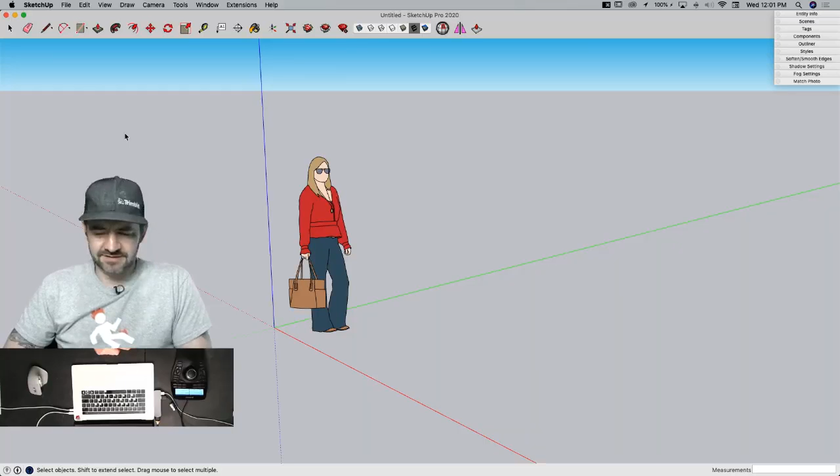And hopefully none of this craziness, bad stuff is getting to you. If so, if you feel like stuff's getting too crazy, just hop into SketchUp and model something, it's great therapy. No charge, oh wait, no additional charge, that's right, for the therapy part.

So we had a couple questions come through. Vlad asked on Facebook about the mouse on the left. This is a 3D mouse, it is made to move models in 3D space using this puck here in the middle. So as I move this around, we move in 3D space. Not a requirement for SketchUp, but a tool for showing 3D models, so it is a design tool too. It does help speed up the design process for me, kind of a nice option to have and a nice way to present 3D models to people. So that's why we use it at some point.

Oh look, it's already there. Jody has put up a link if you're interested in finding out more about it. I've heard that question a time or two before.

Mohammed on Facebook is asking if SketchUp is available for university students. It is, if you go to our website, I forget the name of the tab at the top, like SketchUp for Edu, I think, I got to go catch up. Jody can share a link on that too. But yes, we do have discounted versions of SketchUp available for higher education students. Yes, he's asking for university students.

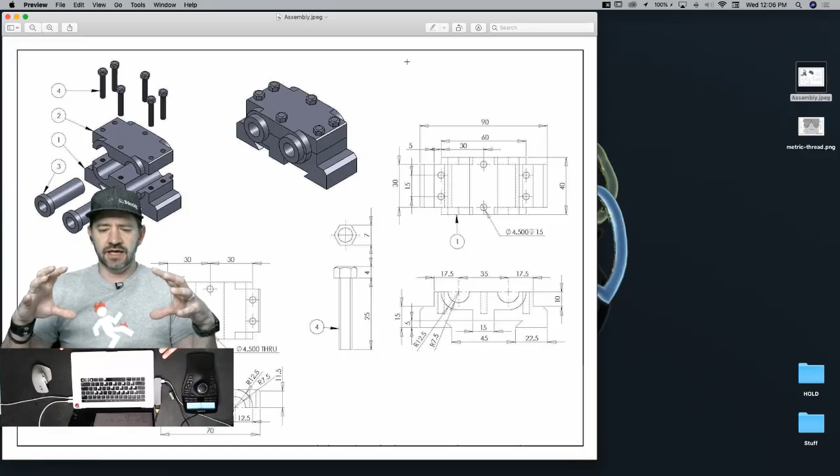With that, the first thing I'm going to do is come out here to my desktop and look at this image. This is a big image, so to pull this up and use it to model, once I shrink it down to fit so it's not covering my screen, it's going to be about that big. You can kind of see numbers, but it's not super clear, so I want to break this into smaller pieces.

There's a couple ways I could do this, but I really want to show you guys the simplest solution I've ever come up with: just do a screen capture. Is it Command Print Screen on Windows, I think? Or Control Print Screen—there's no Command key on Windows. It's Command Shift 4 that lets you grab a section like this. I'm going to show you both ways to do this, real quick, for these 2 parts.

What that does is give me just an image right here like this, so you don't need a photo editor or anything like that. Just make it big, take a screenshot, and then I could import that. If I want to do it 100% exclusively in SketchUp, we could do that too—let me show you how I would do that.

It's going to be a little bit different that way, but it is possible. So what I could do, if I wanted to do this in SketchUp, I would say File, Import, go grab my big image, which is my Assembly.jpeg, and import it. I'll just pull it in.

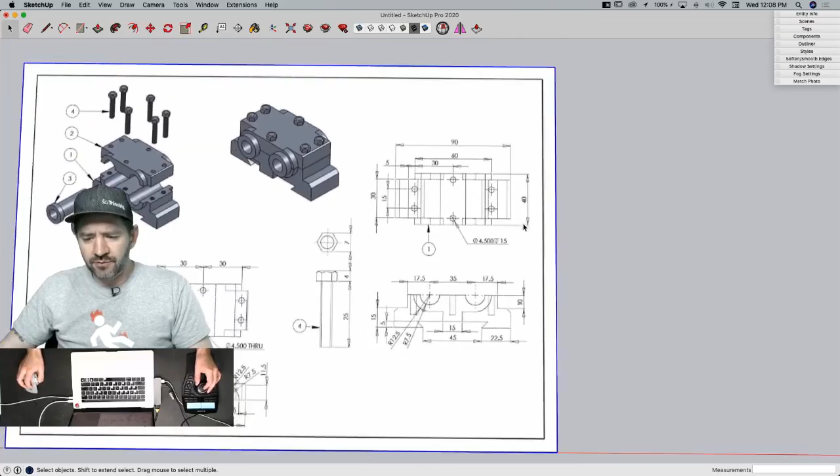All right, so that'll bring it up like this. An image is a weird thing. It's a special kind of container that contains a file. The way SketchUp does this is it actually creates a surface, the exact aspect ratio of the image being imported. It applies the image to that surface and then wraps the whole thing in a special group.

So to get in here, if I wanted to go in and actually cut this up, I could right click on it and explode it. As soon as I explode it, it's just a surface and it has material here. Actually, I'm going to back up one step. This is back into a group, and I want to just show you this.

When I bring this up and look at what's in this model right now as far as materials, it's just the stuff on Laura. Actually I have some extra things because on Monday we played with creating templates, and I created a new template, and I'm using it right now, and it has some extra stuff in here. I bet I have some extra components in here too. Yep, there's some extra components. Oh, I got a mess here. New template. Terrible. Yeah, we better do that.

No, well, let me finish this, and then we'll make a new from template. All right, so when I right click and say explode, it's going to take it out of the group and make it just a surface, but watch my colors over there too, because as soon as I do that, a new material shows up, and that is this piece right here. Once this is in here, I can do things like come in and trace this with a rectangle, and now this is its own piece.

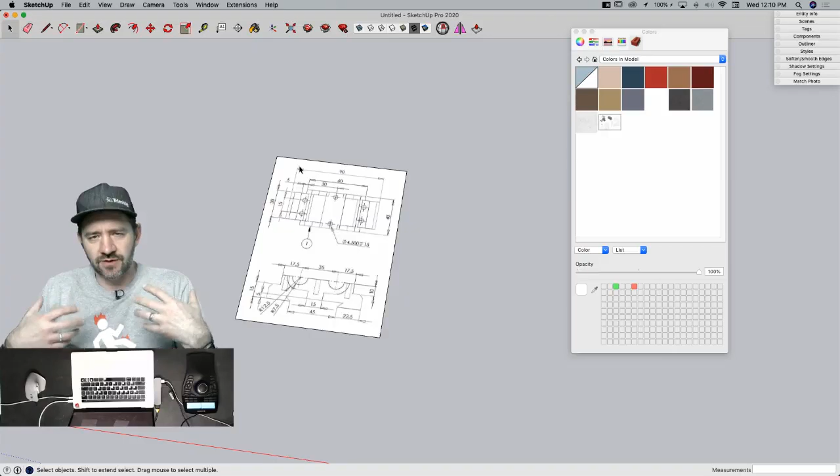What I want to do, because the way I do it is I always put watermarks in the upper left corner so you can see it, I'm actually going to work with my screenshotted images that I created before. I'm going to get out of this crazy template I'm in. I'm not going to save this. I'm going to do File, New From Template.

And I'm actually going to grab... So whenever I was doing this, I ended up using a template that had decimal and metric, and I just did 2 or 3 decimal places, just to make it easier to type all the stuff in. Yes, that is a good way to do it.

Let's go ahead and I'll use my architectural in meters. I'll just go ahead and open that one up. Why is it the architectural ones don't get that pretty green ground or the bright blue sky? They get kind of this gray ground with a gray backdrop.

Architects don't like exciting colors. The gray on gray is more designy, like you're just a pretentious designer at that point. Maybe the idea there is it doesn't take away from the design. The gray is the background, it's there, and then your design's like, wow, nice, right in your face. Yeah, something like that. Pretty sure that's it. That sounds right. I buy that.

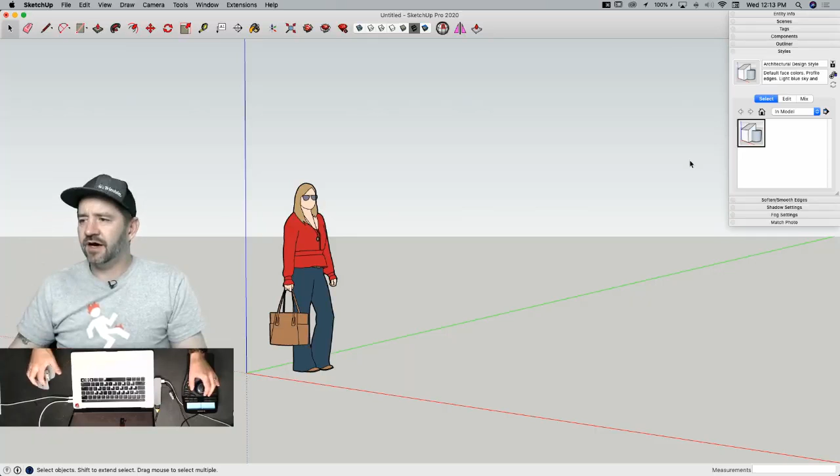I'm going to load one of those images that I cut out. Dave Richards said he modeled his in meters too, which is what we're doing. He also took his and stood it up in the background as an image. That works too - for my part, I like to go to Edit and click on Watermark, and load in one of those two pieces. Can we get that? There you go.

That's the small piece, here's the big piece. I'll go ahead and open that up and put it in the background. I'm going to leave it fully visible and put it in the upper left corner, and then shrink it down just a touch.

I went a completely different direction because I've got two monitors here - I just stuck the full-size image on my second screen, it's not even in my SketchUp model. That's actually how I would do this if I had the ability. I generally do most of my SketchUp work with two monitors, one for reference and controlling the music, and the other where the SketchUpping gets done. But in this case, if I put it on my second monitor, you guys wouldn't be able to see it, and I wouldn't be able to refer to anything. I wasn't meaning to correct you so much as Ian also confirmed he just had his stood up in the background, so I wanted to be clear. There are options, we got options.

Alright, so it looks like the base of this thing is 30 by 90. So I'm going to start with a rectangle that is 90, 30. Boom, alright. And we know we're modeling this big, so let me get Laura out of here before she complains about that.

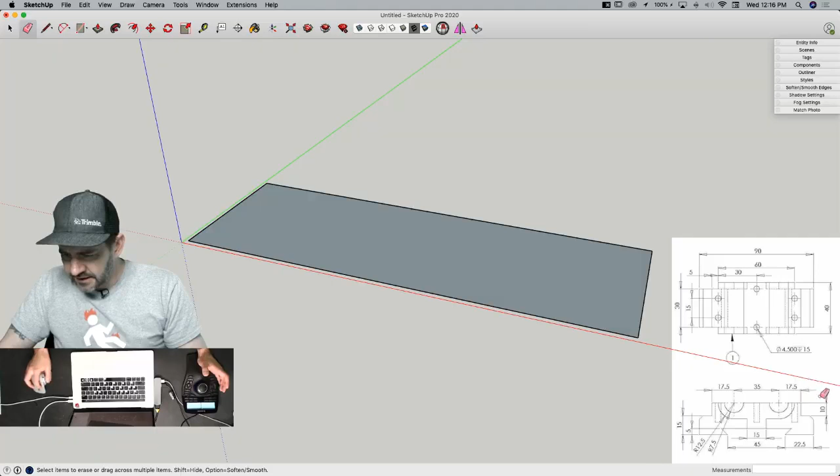This part, the base, is simple enough because from right here it comes up 15, then it cuts in here and here, and then goes up another 30. So I think what we can do to start is take this, pull it up 15, and then figure out what this length is right here. It also doesn't seem to have an angle for that little dovetail on the bottom.

I'm okay making that up - winged it, yeah, that's proper. 17 and a half and 17 and a half is what? 35, right, 35. So this is 35 and 35, which I know to be 70 - not because I did math, because I memorized that at some point.

That's right, you did it on the Gazinta chart. So half of 70 - if I take 70 off of 90, that's 20, so that means this line is over 10 on both sides. I can do this a couple different ways: grab this line, use Move, option 10, or come in here with a line, come this way, 10, Enter, and draw that line straight up. Either way works, either way just gets that face broken - that's the important part, a broken face.

So Manos was typing 10, he typed it a couple times, and I'm all of a sudden having this image of - you ever watch a game show and you're shouting along, no, it's too high.

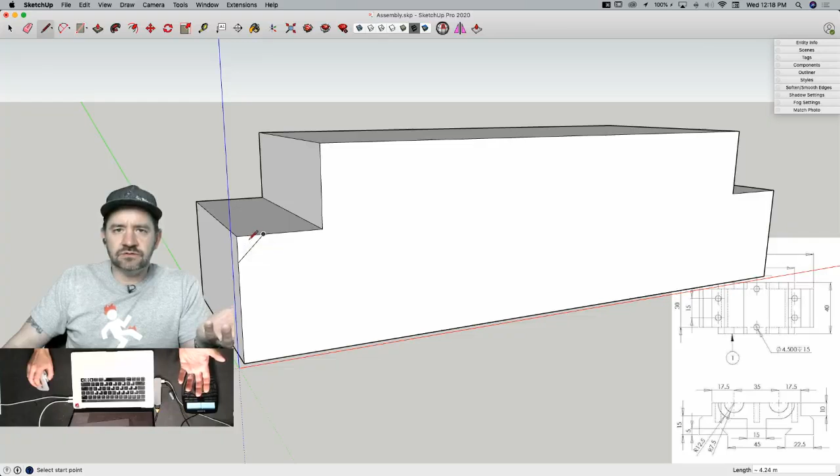This is something else to point out. I don't generally use or keep endpoints visible. In styles, you do have the option under edges to turn on endpoints, which will give you these little dots at corners. Sometimes, depending on what software you're coming from, if you're used to seeing those endpoints, that can be helpful. When I first started using SketchUp, I did keep my endpoints turned on, because when I would do something like this, to do that again, if I came over here and said go this way 3, I needed to make sure that I knew there was an endpoint right there, and that's what it'll do for you.

At this point, I've done this enough times that when I draw my line here at 3, I know it's there, I trust that it's there, and I don't really worry about it too much. But if, as you're learning, you're getting up to speed, endpoints isn't necessarily a bad thing to turn on, and it's not like it shouldn't be on. It's just extra stuff on the screen to get in the way of what I'm doing.

I'm not colorblind, but I would wonder if, because I know green and red are both the bad colors for most colorblind folk, I wonder if that would help a colorblind individual be able to do this a little more smoothly, because sometimes that round dot isn't red. That's also true, or green. My dots here change color depending on what I hover over. So yeah, endpoints might be helpful in that case.

All right, before I grab that and pull this through to knock off the corner, I'm going to select the surface. I'm going to turn on rotate, and I'm going to hover over the midpoint right here. I'm going to hold the modifier key, option or control, and then just rotate that around 90 degrees. By rotating it around 90 degrees, I just took that same geometry and slapped it right here.

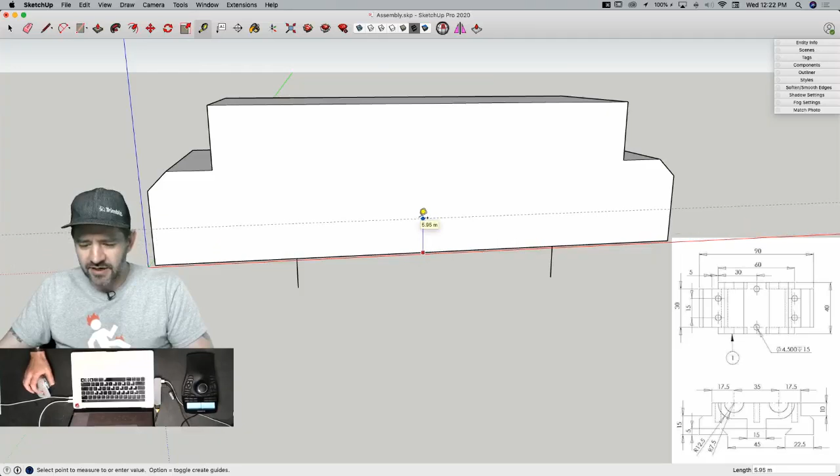All right, so now we know that this is going to go up 5. We're going to have a flat line across here at 5. So I'm going to use a guide - I hardly ever use guides, so I'm going to do it this time. I'm going to grab this line right here, click on it, drag it up, 5, enter, and now I have a guideline right there.

Now, Andrew suggested, since this appears to be symmetrical, why not just do half at a time? I could. It's actually not a time saver in this particular case, because as I go into draw it, I'm going to have to draw 1, 2, 3 lines to draw half of it to get a surface that I could flip over.

My inclination would be to get my angled line, flip that over, and then just connect it with the top. So it's possible. I guess I do this real quick analysis in my brain saying, is that symmetric geometry worth modeling only half of? Even this whole thing, I could chop it in half and model half of it, but the geometry that's copied is so simple, I don't know that's going to save me a whole lot of time to do that.

Yeah, that's your call. If it was a lot more complicated geometry, I would probably break the whole thing in half and model half of it. But in this case, it's simple enough that I don't know how much time is actually saved.

All right, I'm going to go to Protractor. I'm going to come down here, grab this line right here, and rotate that 45 degrees. That's the only reference I need, because I can draw this line up here from the corner to the point it meets right there. Then I can grab that line, do my rotate thing again - find the midpoint, rotate it with the modifier key, 90 degrees.

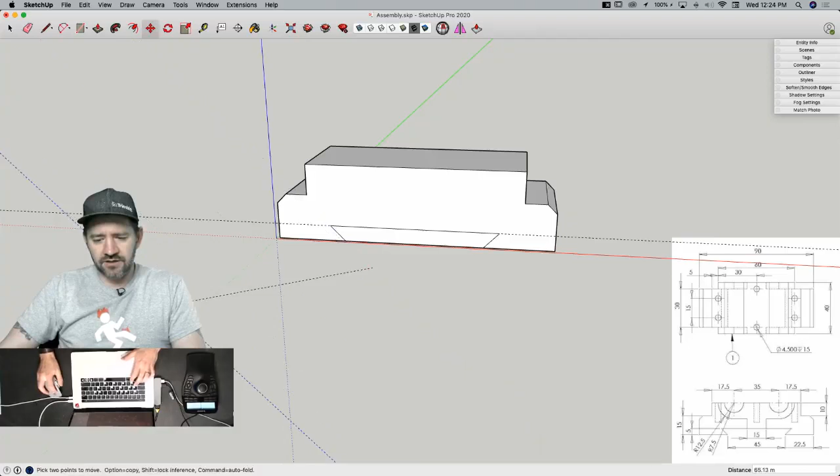At that point, I can get rid of these little lines I put as placeholders, and I could also get rid of those guides. Somebody asked how do you get rid of guides - they're just geometry, there's actually nothing special. The nice thing is they're lines that don't break other lines when they touch, but as far as how you work with them, they really just work like edges do. So if I want to move one, I just pick on it and move, rotate, whatever - nothing special to them.

There's also a command up here where I can go - I should remember where it is now. Tools? Is it tools or view? Edit. I don't have any, so it's probably grayed out. Where's delete guides? View - it's right there, it's highlighted, the 8th item down under edit. Oh, delete guides, I was on it - that's why I was looking past the one that was actually on for something else.

Delete guides will take all of the guides that are not hidden at the time. Or somebody pointed out you can hide them if you want to use them later - that works too. All right, I'm going to take that, push that through the back side, and we have our base geometry for this chunk done.

I do have - so this piece right here, this kind of looks like the front of a Jeep, Jody. A little round, and hey, then, yeah. Or a robot, cartoon skull or something. E.T.? Yeah, yeah, these are all good kinds of answers.

So Ian said having a mapped shortcut to deleting guides is really useful. That's a pretty good idea - I suppose if you use guides, getting rid of them is something you want to do on a regular basis.

Well, he also did say above he was a sucker for guides, so hey, he's the guide master. He's a guide guy, he should write a guide. Ooh, then you could call it the guide from the guide guy. Yes.

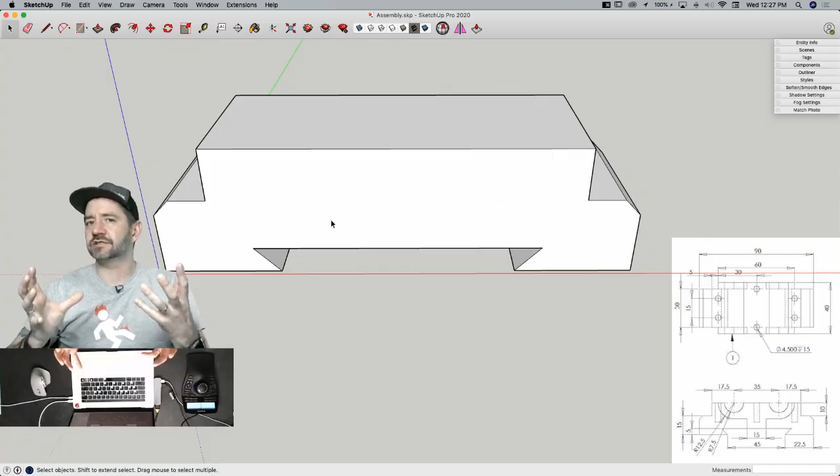With this, that means I'll have 12 there. So if I come back to draw an arc later, like half an arc, I know I'd use half of that 48 if I want to match the geometry. So what I'm going to do is continue on with this guide thing.

I'm going to grab my tape measure and pull a line this way, what was it, 17.5 according to my drawing, to the center of that circle. And I'll pull one off of here too. 17.5. So these are the centers of my two circles.

So now I'm going to go to circle and set my sides. It's popping up down there as 24, I'm going to type 48. And then I'm going to go right here, and make sure I pull my circle along the red axes.

That's going to make sure that I align my axes the same way. So anytime I draw a circle, if I pull along the red, they'll be lined up correctly. And the radius is 7.5.

And now I could draw that again, or I could grab these two halves and just copy that to right there. Either way works, whatever you feel best with.

All right. You do you. That's right, you do. Just do your thing. You be happy. Be good.

All right, so I have another circle, same spot, coming off the same spot. That's 12.5. And I guess I could have waited and copied all of that at once. That would have made a lot of sense.

But yeah, sometimes you just get excited. Your enthusiasm is appreciated, it shows. That is a thing I do. I try to put positive spins on it too.

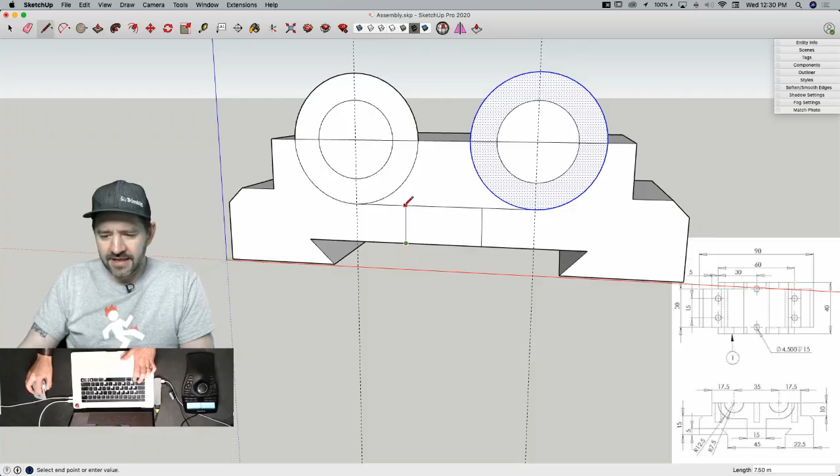Hold on, I could come here. Wait, you don't have that many fingers. This would be kind of my default, is to click here, come this way 7.5, and then go to that point. 7.5, drop that down, come this way the full 15 meters, and then take that one straight up. That would be my default way of doing this, but I want to show you guys some different options.

We're on this guide kick, apparently. So what I'm going to do is just draw a line right here in the middle for right now, and say, put a guide here, 7.5, here, 7.5. And that gets me that same reference geometry.

Another option. All right, I got one other way that I could think of doing this. This one's a little obscure, a little weird, I admit. I could come down here, anywhere on this bottom edge, click, and draw a line that is 15 long.

So now I have a line. This line is separate from the geometry here and here, even though it's in line. I'm going to turn my endpoints on so you can see this easier.

I can see that break right there, this line, and now I could grab that line while it's highlighted, go to the midpoint, drag it over until I find the midpoint of this other piece. And then from there, I could just draw my lines up. So we got options, we got different ways to do it. That last one's kind of weird, but I did no math. That's the only one I used without any math.

Okay, alright, fine. So a self-issued challenge there, and that would be my solution. I wouldn't recommend it either. Personally, I'd say the guides treated me pretty well right there, so I'd probably stick with that method because that worked out pretty well.

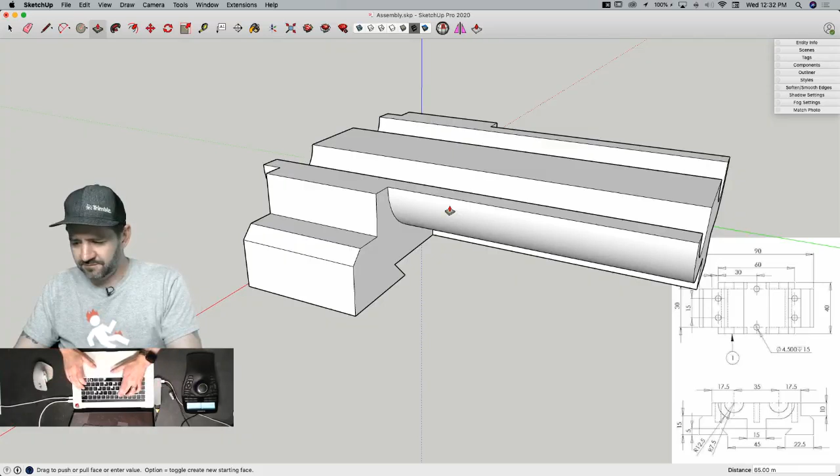Alright, now just come in here, push pull this through, push pull this through. Looks good. Pull this one out 5. Pull this one out 5... whoop, or 65. Try that again.

If you mistype something, SketchUp, as long as you don't go to another command, you can always retype the dimension. So even now, I haven't done anything else, so I can come in here and type 12, I could type 3, it's going to move as many times as I type something, as long as I don't go to another command. Once I go to another command, now I'm in select, and I can't just type things anymore. I can type them, they just won't do anything.

Alright, that looks like our first piece, sans screw holes, because we haven't made the screws yet. So that looks pretty good.

I'm going to grab all of that and I'm going to make it a component. I'm going to call this the bottom piece. Or you could call it the Jeep, or the frog, or the Jeep frog skull. Yeah, yeah, yeah, that it is. Okay cool, so that one's done, that looks good. That's easy.

I got nothing more positive things to say because that pretty much covers it.

I'm going to go back into my styles and go to my watermark and swap it out for a new one. I'm just going to delete that one and add a new watermark. I'm going to grab the other - excuse me, hopefully this is not something you have to worry about, this is just what I have to do because I'm working off my one screen. But if you're ever in a situation where you have one screen, this maybe is one of the pieces of knowledge you take away with you today, is how to use a watermark for reference imagery.

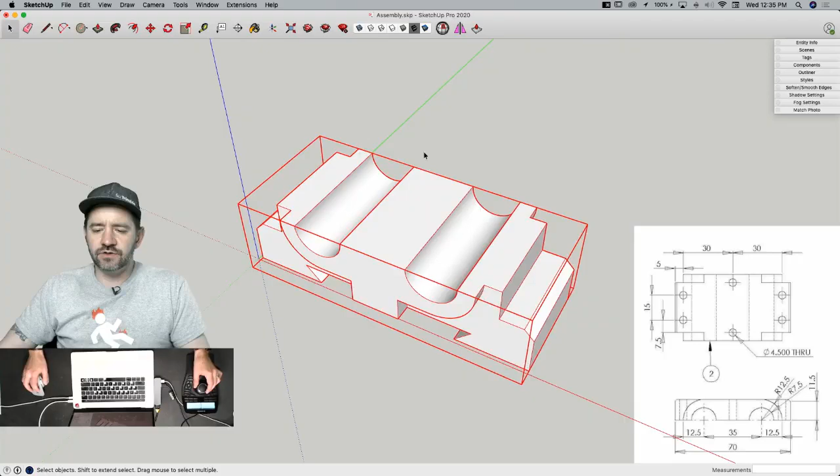I'm going to right click and lock it. By locking it, I just told it that I'm not going to accidentally come in and select it or move it or anything like that. It's going to stay right where it is, but I can come in and work on top of it.

So the base here, this should be 60 by 30 - no, 70 by 30, 5 plus 30 plus 30 plus 5. And that's that rectangle right there, that's this inner rectangle - or outer, I'm sorry, outer rectangle. That has a height of, oh come on, it has a height of 11.5 to the bottom of the corner.

We talked about this. Yeah, seriously.

What I know is that this geometry repeats up here, and this outer circle is 12.5. So the overall height here is actually 12.5 with a 1 meter 45 cut off the edges. You can intuit from the math that the chamfer on this piece is only 0.5, possibly, because it looks like it's only 0.5 up there. Is that correct? This is 1, because 11.5 to 12.5, so that's a 1 meter. But no, I think they're different. Maybe it's a 1. I'd have to look at the model again because this one looked a lot bigger.

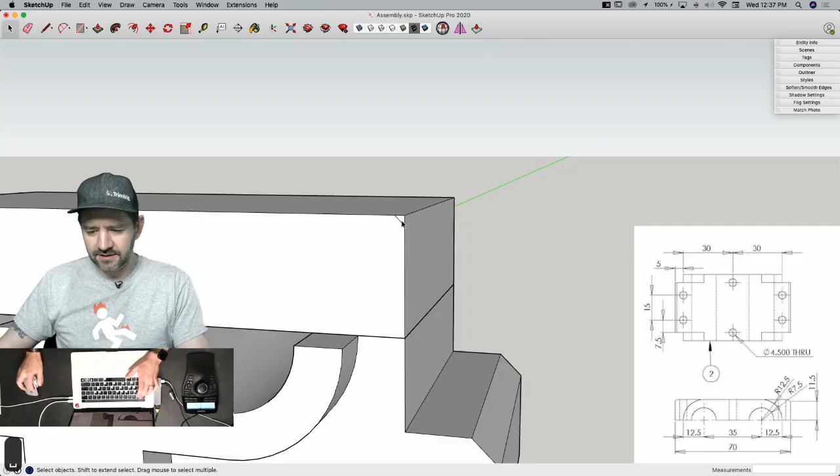All right, so I'll do 1. I'm gonna come here, drop down 1, which should be 11.5 from the bottom. I'm gonna go 1 this way, and then do the same thing I did before - I'll grab that little shape right there. Actually this gets a little trickier because I can't rotate from the center of this point. If I rotate from the center of this point, guess what's gonna happen - that's going to show up on the outside edge. Why? Because I just shortened this length by 1 meter by putting that on there. What I can do though is use the center of this one below and swing it around like that, because this line is still the full length. I say that like a person who's maybe done that incorrectly before.

Adam Seb1 on YouTube wants to know why you're doing meters and not millimeters. I can answer that - SketchUp at its heart is an architectural modeling tool, that's what it was made for. So it's not created to generate sub-millimeter geometry. One of the things we're going to be doing is creating screws with threads on them, and that's going to be fairly small geometry if we modeled in real size. So we're going to model in - was this 100 to 1? Is it meters to millimeters? 100? Is that 1,000? Bigger, 1,000, right? Cent is 100. Mil is 1,000. What's a decimeter, is that a decameter? Decimeter. So we're going to model everything using the same units - we'll model it all in meters, and then scale it down by 0.001 when we're done to have everything be the accurate, perfect size.

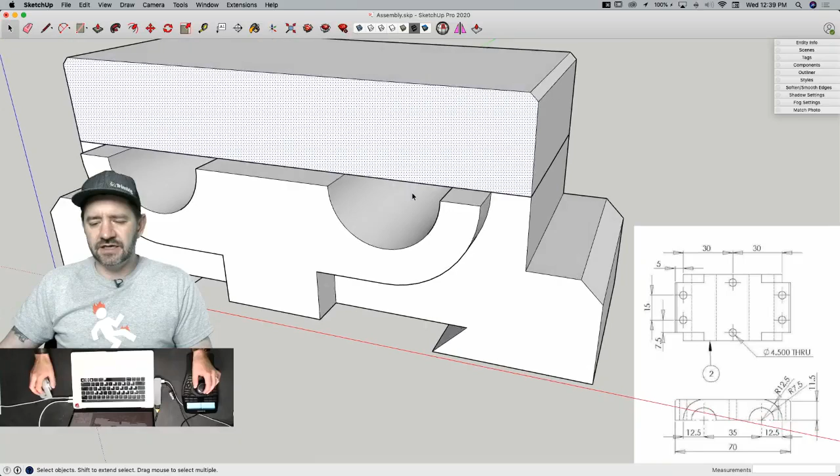All right, this looks awesome. So one of the things, if I do say so myself, that we could do is I could hop in here, grab this face, copy it, come back out of context, paste it, flip it over, and put it on here to speed up my input. But the fact of the matter is this is two curves that I'm just going to copy over, so I'm not that worried about it - it's pretty simple geometry. If this were a lot more cut up with curves, or came up and curved down like that, I might be more tempted to grab this. But right now I can actually come in here and, no, I can't do that.

I'll just do the same thing I did before, where I'll grab my guide - I'm learning all about my guides. 12.5, whoops, 12.5. What did I do? 17.5, I'm sorry. It's 12.5 from this line right here. I can take this one in. 17.5. You think you're just trying to be too efficient, getting ahead of yourself.

I'm getting something. All right, and then I'm gonna grab my circle, which is still at 48 sides. I'm gonna click here again, drag across the red axis, and at this point I can actually snap - I can say come this way, and that snaps at 7.5. I'll do my second one right here to 12.5. So, like I said, I could go copy geometry out and bring it in later, but I don't know that it's that big of a time saver. I like time savers as much as the next guy, but sometimes processes you think will save time aren't as much help as they could be. Copying stuff in particular is a double-edged sword - sometimes you grab a bunch of geometry and it has to be so heavily modified after copying that it would have been quicker to recreate it in the first place.

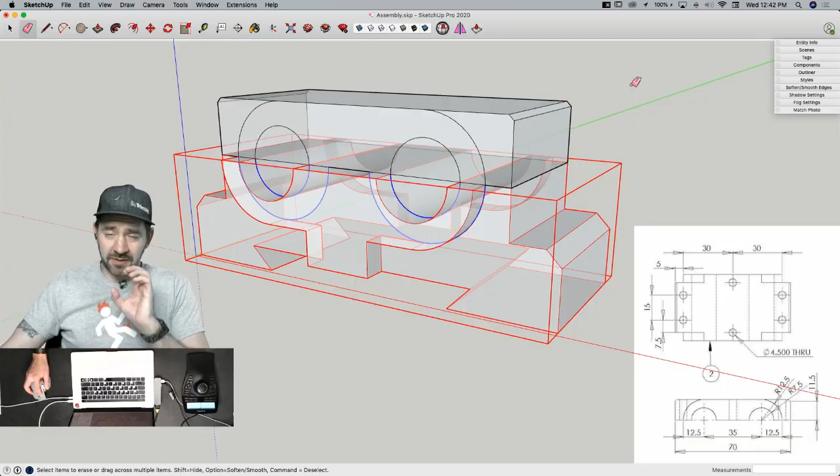So there's a couple things I could do. The easiest one, though, and I'm going to leave on X-ray, is to just swipe my eraser across here, because the only thing that'll get erased are the pieces that I just modeled. Remember, my bottom piece is locked. So even though I drug the eraser across there, it's not going to go away. Just those pieces below are.

All right, last piece. Same thing I did before. I don't need to work in X-ray. I can go, let's rotate, middle point here, drag it across green axis.

I've gotten people calling me out on how I say the word axes. Axis. So there's two different words there. I know, axis, so you can say axes, each one. Axes? Plural, singular and plural. Axes. That's not right. All right, I'm going to just double click. There's something about Axe body spray in there too, but I don't know it. Yeah, that's same spelling though.

All right, so there we go. Yeah, we have our second piece. I'm going to triple click and make that into a component. And I'm going to call this my top piece. Boom. Bottom piece, top piece.

If you didn't need to connect the two together, then you'd be done. That's true. But I do. Alas, I do. So I'm going to lock that piece too. I could be tagging these two as I go through. I could actually tag these each with different levels or with different pieces, but Command S. It's such a simple model. I don't know that I'm going to even turn anything off right now. So this is easy enough.

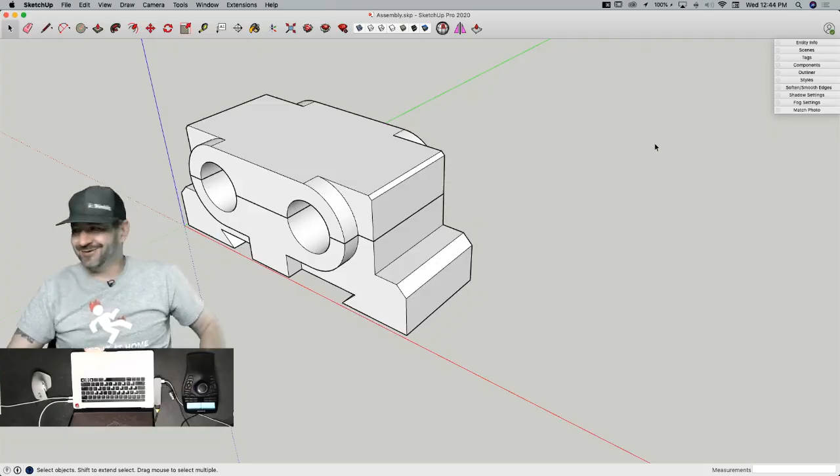All right, good stuff, we're there. We're back at it. Okay, let's see, what is next here? We have these sleeves that go into the hole. If I come pull up my main drawing, you might call those again bushings. Bushings, I like that term.

These are pretty darn simple. There we go, I'm going to just do the same thing. I'm going to take a picture of this right here, and then I'll import that to model from. I thought they'd be simple enough, there's like 4 dimensions, but let's be honest, I don't need that as a reference image.

I just forgot how to remove a watermark while I was in the process of removing a watermark. So I'm just going to be fair about where I am. I said on Monday, right? You know, it's unprecedented, crazy times. Just do what you got to do to get through it. That means I'm going to pull in reference images even though I don't need them.

Okay, that's the thing we're building. Let's talk a little bit about components and axes. That's what we're going to do now.

All right, so I'm going to draw this totally separate. I could draw this in place over here, but I'm going to draw it totally separate over here, and we're going to go place it into the main model. I'm going to start with a circle. I'm going to draw it on the ground, and I'm going to pull out along the red axis, same as I did with my vertical circle. I'm going to pull the axis.

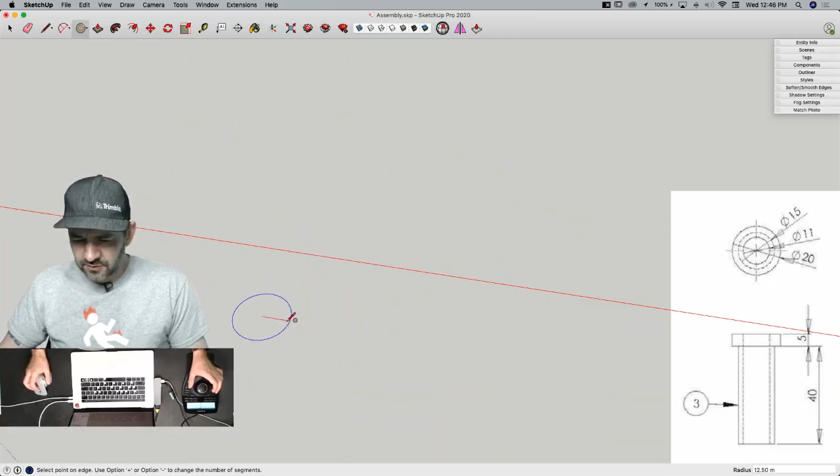All right, so I'm going to pull this out. I'm going to actually create my 3 circles right here. I'm going to pull out the first one to 11. I'm going to hover over the middle, pull out along the red axis to 15, and then one more time from the middle to 20. I feel like now every time I say axis, I'm being a smartass.

You know, I tend to think you're just being a smartass anyway. Yeah, so, we all got our thing.

All right, so I'm going to take this one in the middle, delete it. I'm going to start by pulling this up 5, and then pull this up 5 also, and then pull it up another 40.

All right, I'm going to draw that actually a little bit different now that I thought about it too. You know, sometimes the second time you draw something it's easier than the first time. I'm going to draw my first one with a radius of half of 11, which is 5.5. My next one, I'm going to pull out to 10, again on the red axis.

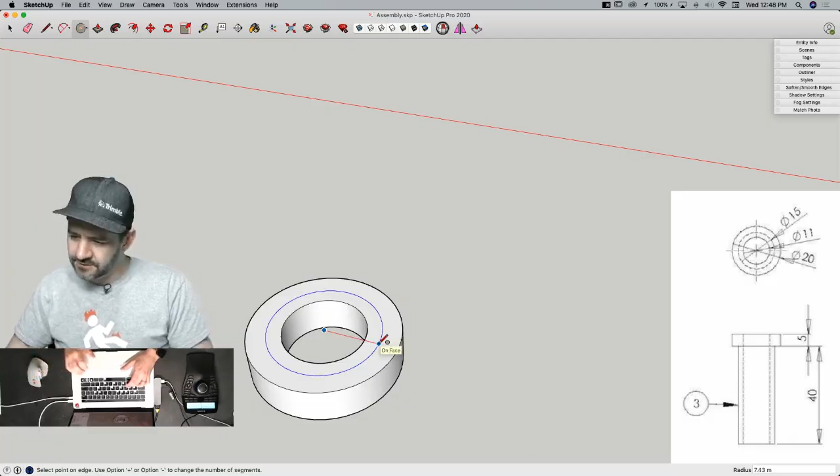All right, now I have another circle I can come over here and draw. I'm going to hover over the edge, go to the center, and pull that out to half of 15, which is 7.5. Then I can pull that up the other 40. All right, we've created a bushing.

That's it, that looks more appropriate, you didn't argue with that. I was right? I remembered the term you used.

That's right, bat 1,000. All right, so I'm going to take this and make it a component. I'll go ahead and call it my bushing.

Now let's talk about our component axes. Yeah? Yes, yes, it says it right there even, your cursor is literally pointing at the word axes. No, that says axes, like I have 5 axes that I cut wood with. Oh, that's a good point, stupid English language. I only use 2 axes to cut wood. Well, I use one, I have one for each hand, okay? So you have 5 hands? I was waiting for that.

All right, so now I'm going to talk about making those component axes, placing those component axes. So when I grab this as a component and pull it into my model, it's going to get placed based on how I set this up. Right now, if I did nothing and just created it, it'll always take your geometry as if it were inside a container, take the lower left corner and make that your origin. That's how it always starts out. What I want to do is put it somewhere in the middle so it's real easy for me to place it into the model.

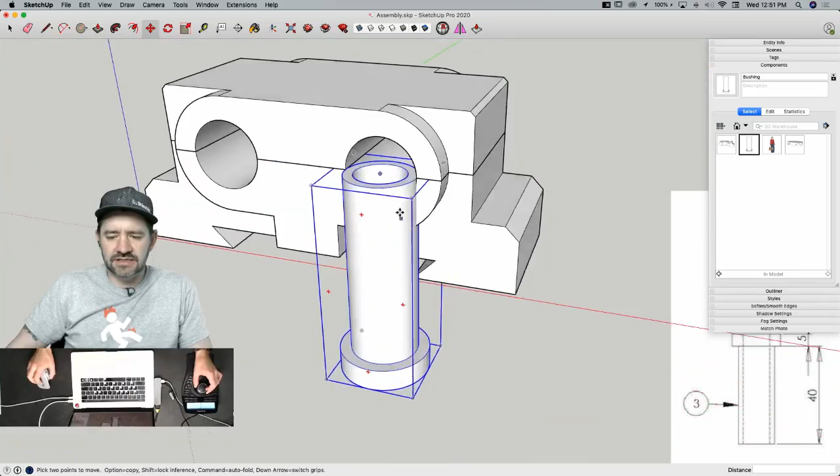To replace an axis into a component, all you have to do is double click to enter the component and grab the axes tool. Now that I'm in here, let's look at rotating it. Instead of having this portion be up, I want the top of the tube to be vertical. So I'm going to click right here, and it says pick direction for red axis.

The red axis is correct, it should come this way. Green axis, oh dang, will be vertical. So if I drag up on the blue axis and click, now I have my green going this way. If I click outside to exit, it's going to prompt me that I just changed the axes of this model, asking if I want to do that. Yes, I do. Now when I bring this in, look, I'm grabbing it by the same point, but pulling it in from the opposite side, in the correct direction. So now I could come over here, hover, find that middle point, and drop it right there.

Nice, same thing here. So both YouTube and Dave Richards have offered to muddy the waters. YouTube says he calls it a hatchet, not an axe. And Dave said you could use origin. So now I got to replace my hatchets for my bushing? That's exactly right. Oh no, the cutting thing. Gotcha.

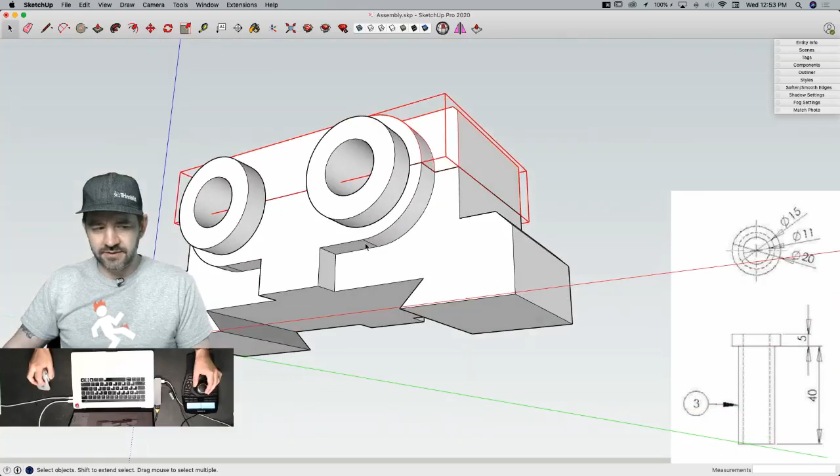First thing, just looking at this, a couple things I want to mention. One is this line right here, it's also on the bottom. These two lines, I don't have to keep those here. I'm going to actually grab both of these and unlock them. I'm not exploding them, I'm keeping them as components, just unlocking them so I can modify them. If I double click, I can come in here with my Alt or Control key and just smooth those surfaces. I like the look of that better.

Same thing on the bottom here. I could come in here, Alt, erase, or I could triple click, then go to Soften and Smooth and say Soften Coplanar, and that'll get rid of it too. I only tend to use Soften and Smooth if I have more than a handful of lines I want to soften. I like the precision of being able to go in and choose which lines I want, or if I'm in a situation where I have a hard line that will otherwise be softened by the engine and I want to keep it, then I'll manually soften those lines. But that looks pretty good, that turned out perfect, exactly what we were looking for.

All right, hey Tom, welcome. You may have been here for a while. I haven't looked up for a while. Well, he's in there dropping terms like X, Y, Z for defining your axes. Who's Zed? Apparently he has something to do with axes. Was he a programmer on SketchUp at some point? Maybe he's the lead singer of Molly Hatchet.

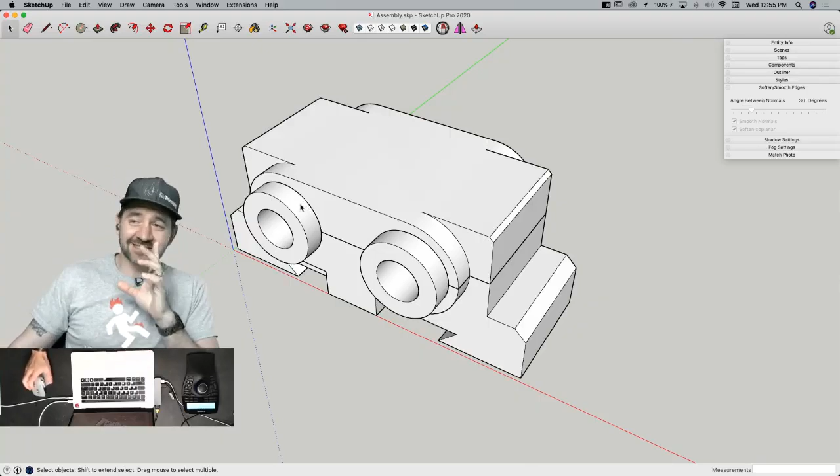All right, so let's talk about screws. I did a couple videos a while back. Was that maybe a year or two ago? Zed from Molly Hatchet, yeah, that sounds right. Yeah, that's good, oh I believe it.

Yeah, a couple years ago I did a video. It was right when SketchUp for Web came out, on modeling a spiral and then turning it into kind of an arbitrary screw pattern. It was not a precision model, just kind of how do I make this screw pattern using only native tools. It really consisted of creating a spiral, then two spirals overlapping on a cylinder, and then shrinking one of them to pull the edges in. It worked pretty well, the geometry still works, and it will give you a screw looking pattern.

What we want to create here, though, is an accurate screw, something that is a real screw with proper pitch, that kind of thing. So let's take a look at how we'd go about that. I think I posted this too, I have a picture that explains how pitch works.

So we do have the M word here - we have some math going on. We have the pitch, which is the distance from either the valley or the peak of the screw, and then the angles between the two.

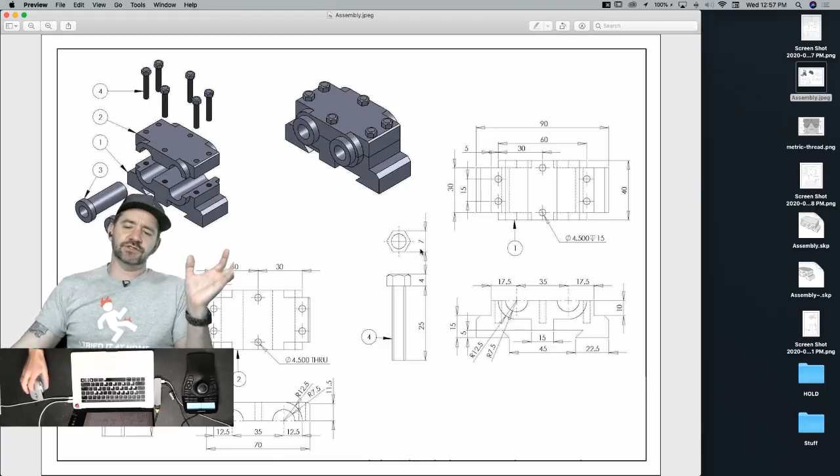So that's not awesome. As much as I like doing these machine drawings because we get to be pretty accurate with them, unless that's this 4.5 outer diameter for this circle - that could be what that is. Is that this width right here?

But I was looking up... not that one. And you saw some clouds? No, I only see ceiling. Oh, if I look at...

This website, torre.us, actually has, based on materials and screw sizes, how big some of this stuff is. So Dave's saying it's a 4mm screw - it's an M4, where the pitch is 0.7. So that's really the thing I was looking for, was finding that number.

So our nominal, okay, so it's 4. So let's do this. I'm going to have a circle that is 4, and I'm going to have a pitch that is 0.7, and we'll model from that.

So now when I come in here to draw my screw, I'm going to go grab my circle. Right now my circle is - you're right, I keep saying screw, this is actually a bolt. Cowboy pointed that out - we are actually creating a bolt and not a screw. Nice try, though. People kept asking for screws, so I'm actually not providing what anybody asked for.

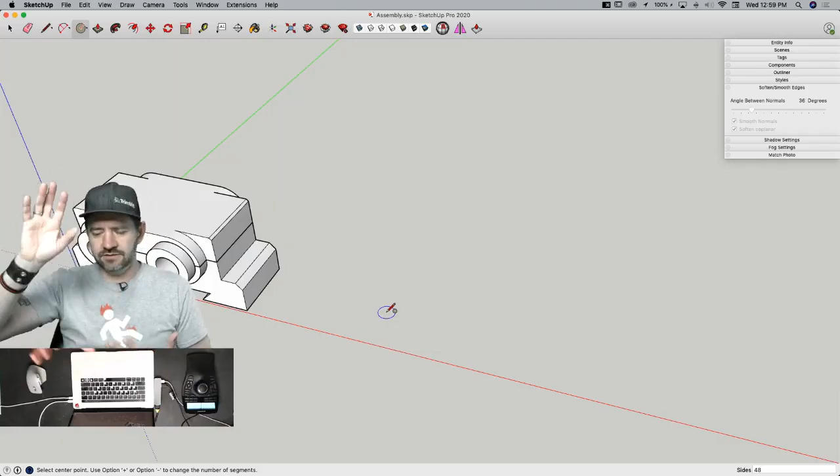Okay, Dave Richards pointed out that machine screws are not tapered, so we're creating a machine screw. All right, I'm going to use the Tom term and call this a thingamajig. I don't know what else to do.

Okay, well, YouTube's asking if you could imperialize it for him. Well, it never hurts to ask, because I can't physically interact with you in any way, much less hurt you, so ask away. The worst you can do is ignore him or say no - I don't know which is worse.

So yeah, we're doing a metric screw because our whole model has been metric thus far. One of the nice things about metric is it's very easy to scale up and scale down - you don't have to worry about all kinds of weird fractions and stuff. I'm a big fan of base 10 mathematics.

Okay, you can do that. That sounded really fancy and smart. It did - it's smart enough to make me not want to reply. You just shut me down, Jody. Okay.

So here's the thing - right now my circle is 48 sides. That's going to create a very, very dense screw geometry, with a lot of pieces that are very small. I don't need to do that. I don't have to have this be super highly detailed.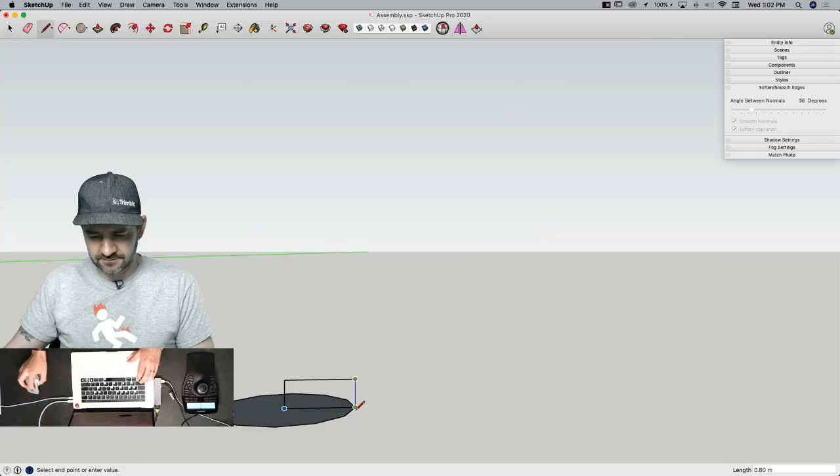A double hexagon. Oh, that sounds about right. I'm pretty sure that was a total lie. I looked it up, I didn't know before I asked. Is that a dodecahexagon? Dodexagon? It's just a dodecagon. That makes sense. Or maybe it's pronounced dodecagon. I don't know, could be. I would take any of them. Thanks, all right, all right.

So I'm going to actually import this because I do want to reference this. So I just drew this - this is just a rectangle. Oop, hold up, back up. Just wait, what the heck do you think you're doing? I'm going to take this. So I drew this out onto the x-axis just like I normally would. But I'm going to change it right now.

Actually, let's do this. Let's grab all of this stuff, scoot it over, and work on the axis. A lot of times when I'm working on round things, I like to work off of the axes or the origin of the model, because this gives me a reference line all the way up the thing I work on. I don't have to worry about maintaining the center - I can just work off of that. So what I'm going to do is, because I'm going to be doing a follow me, I want this to be a little bit different. So I'm going to rotate this.

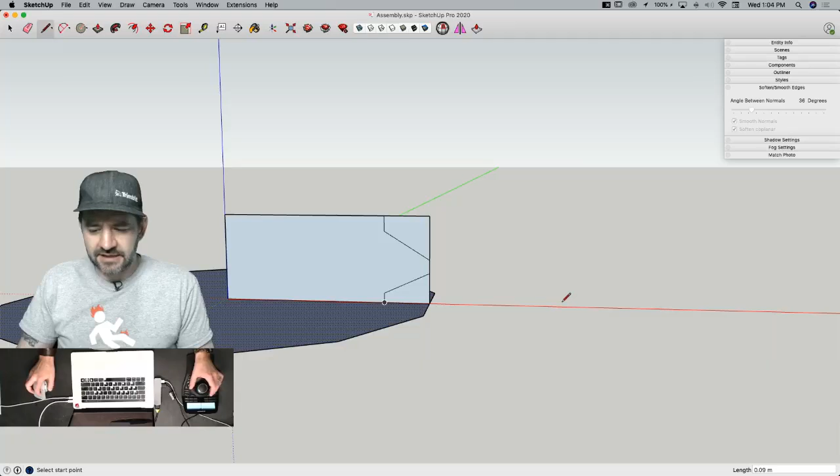I'm going to grab the center point of one edge and rotate that to the axis. And now I'm going to draw a line that goes up our pitch, which was 0.8, over to here, straight down, and back. And now what we'll do is we're going to come in here and create our pitch, something like that. That's not the right numbers - I was just kind of illustrating what the heck I'm trying to do here.

What I got to do is get that profile, figure out what that is. And that's where I'm going to come over here and go to Styles, import again an image. Put it down here. Make sure there's enough room to get everything on the screen at once. All right, there we go.

All right, so what I want to do is get this measurement right here - this P is this dimension right here. This point right here is this spot right in the middle. All right, so I only want to create half of it.

And I start... John pointed out that an M4 pitch is 0.7, not 0.8. Oh, dang it, all right. Well that just made my math not... Who pointed that out? John? Okay, you're responsible for doing the math coming up. I'm going to bring it down 0.1. I got all excited because this math was going to be easy, and now it's not.

So I'm going to draw a line right down the middle, because I only want to create from here to here. So now the first thing to do is figure out what is 0.7 divided by 8? And now we'll wait 45 seconds to get the feedback loop in there.

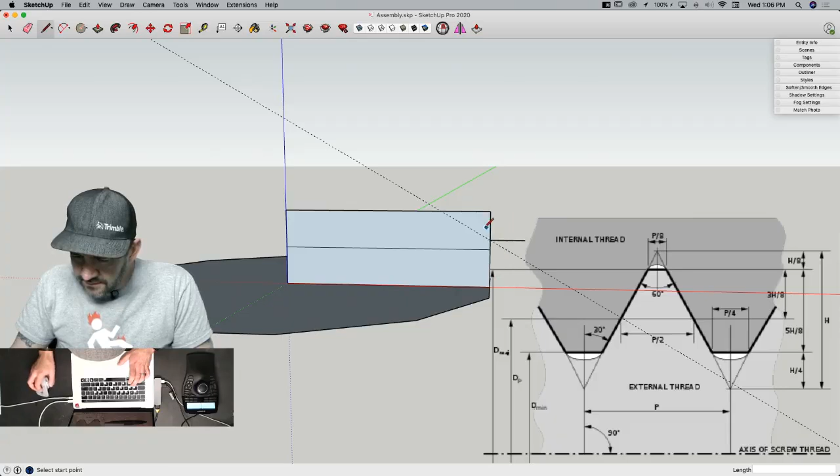I don't know where we figured that out from - oh, there we go. 5H, what the crap is H? Oh, this has to do with my thread. 0.7 divided by 4. Hold on, so many numbers. Because now I have my H, which is, I believe, related to... course, or no, that's the pitch. That's this. Oh, H is right here. Okay, never mind, I got it. So if I go... Yeah, that's the one thing that does not appear to be defined in your original picture. Right, so this is my H.

That number, 0.61 meters, is my H. So what I need now is, Dave said you need the minor diameter.

I wasn't ready for all these numbers, you guys. All right, somebody do this for me: 5 times 0.61 divided by 8.

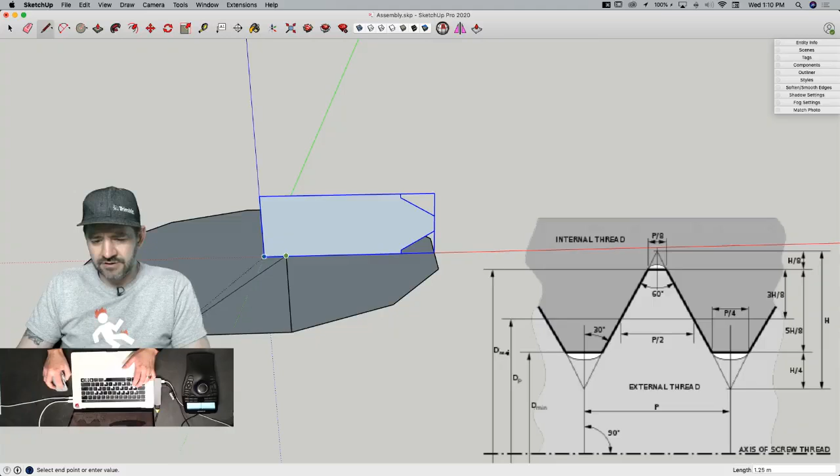Yes. And now I'm going to take that line and rotate it from here to here 11 times, the whole thing like that.

I'm going to grab all of this except for my profile. I don't want just my lines. I'm going to move them with a modifier, vertical, 11x.

No, this is wrong. Looks like I went really aggressive really quickly. Maybe you'll need to go up half that thread. Is it half or is it 1/11th? Because this will go all the way around one time, right?

Oh yeah, yeah. So what I need to do is take this vertical line and divide it into 12 pieces.

That's not much, let's see what happens. All right, so I'm going to grab that line. The process is the same regardless of how I do this.

And if I come here, click here, option here, 11x. Now if I look at it from the side, obviously it's easier to grab them if they're a steeper pitch, but it's still just a matter of selecting like that, turning that off, and then I can move it from any corner.

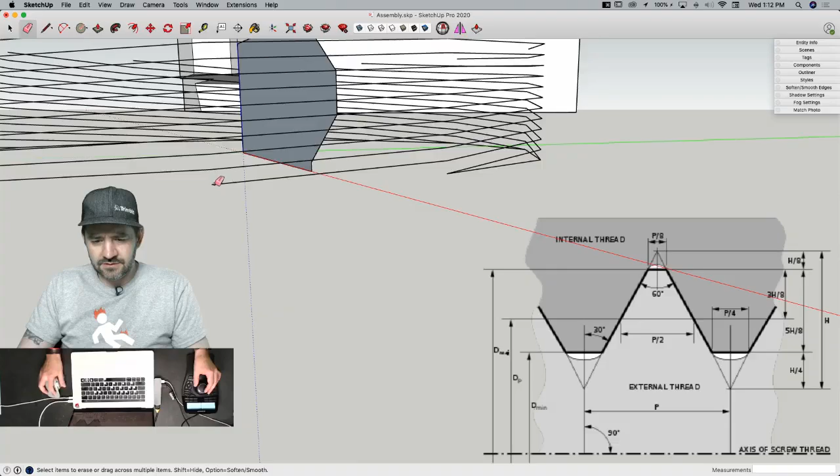All right, Dave Richards said he uses Curve Maker to create the helix. I'm going to grab just one of these pieces and say make group, and that way I can grab everything that is not this group and delete it.

All right, I'm going to grab this, put it up once, and say 9x, something like that. I'm not 100% sure it's going to happen right now. All right, I'm going to take all of this and weld it.

I'm going to explode that, grab that, follow me, edit group, and boom.

Yeah, that is not correct. Awesome. No, my geometry is not actually on the thing. So let me try... there we go.

So I think we're coming back to that wonky thing where it's got to be perpendicular to the right. Ah, that's it, yep, starting point. You're absolutely right. So it's on the line right now, but it is not perpendicular to the line.

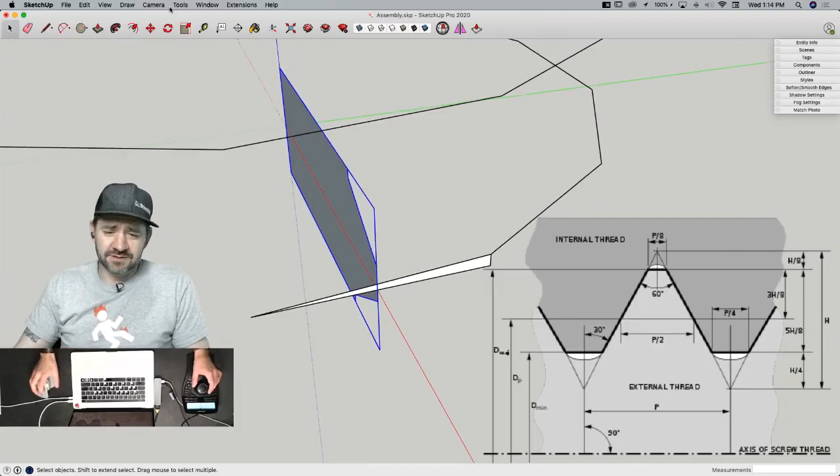All right, let's stick on the red axes. And then this is currently 3.2-ish.

Here's what I'm going to do. Yeah, it looks like upright extruder would definitely be the way to go. Yeah, probably so, eventually the way to go. I was hoping to do it without using extensions.

So let me just bear with me for one moment. I'm going to take this right here, take the flat. I mean, if you only made a quarter of this and then just rotate it, or an eighth of it, once you create the initial starting climb, then you can just use that one piece and wrap it, rather than do the full follow me the whole way.

Well, it shouldn't be a difference, right? I should be able to go... Well, it's just if you notice, it gets worse the higher you go. That it does. Why? I want it to not get worse.

Thought I was perpendicular. I thought I was good, but I wasn't. I wasn't good. Yeah, I thought I could make that work, guys, but I can't.

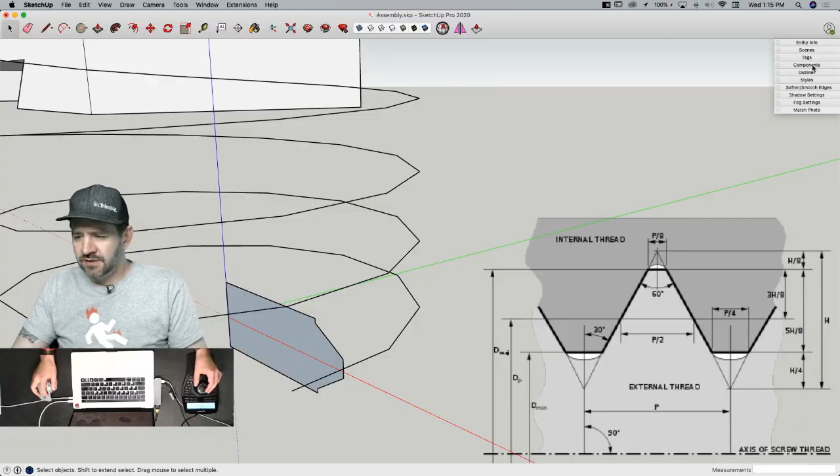So talk to me about the JHS Power Bar or whatever it's called. Is that just basically someone's compilation of other people's tools, or are they all tools created by that one person? Yes, they are a compilation. So I think Eneroth, thomthom, I think has some on there, Tig, trying to remember who else. But yeah, it's a really cool extension. It's good stuff.

All right, get rid of that. We'll go grab upright extrude. Actually, we'll just turn on - I happen to have JHS Power Bar right here. Boom, just right here. Someone else suggested Follow Me and Keep. Actually, that got mentioned a couple of times. I've never used that and don't have it, so I'm opposed to that idea.

Just because I know how this works. All right, so if I grab this right now and I can use upright extruder, I think this is going to work. Oh, I had to select the face. I think I have to explode it too. All right, so if I grab all of that, I should be able to just hit upright extruder. That didn't work either. Wow, batting a zero.

Connie said you already have upright extruder installed too. Oh, was that in there also? Although, I'll be honest, you guys, my extensions are a bit of a mess right now. So yeah, I don't know what I got going on.

All right, so I'm going to try something. I'm going to do this real quick, and if it works, I will undo and explain what I just did. All right, let's try upright extruder on that. No wait, that's not it. That's upright extruder.

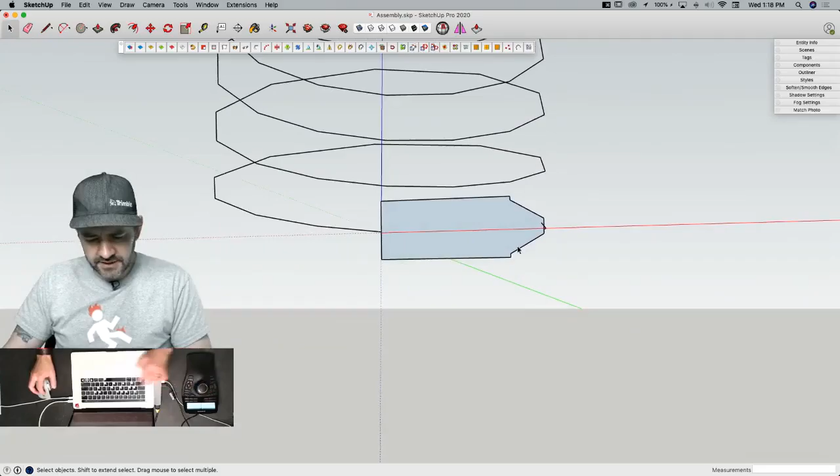All right, so what I did was I modified my spiral ever so slightly. Don't forget to save. I was trying. Oh, that's why it was weird, it didn't save. I saved, let me try this.

Let me grab Follow Me and Keep on my spiral. SketchUp tutorials says Follow Me and Keep will do it correctly. Well, I never have used that. Let me see what happens if I...

Rotate this. So this is right here. I'll grab this and extend this. Okay, I'm just curious, I'm messing stuff up. I'm making a huge mess here, but let's see what this does.

I wasn't planning on having to use this. I thought I was going to be able to make Follow Me work. I was not able to make Follow Me work. Well, that kind of created something similar. So that made no difference.

I mean, what I got is, so from here to here is 0.7. So I have a properly dimensioned... yeah, now we're just talking about different extensions that will do this, but yeah.

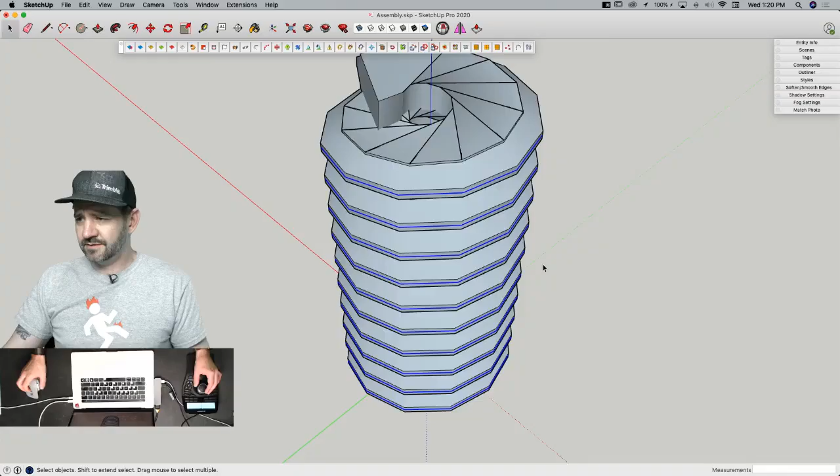Yeah, I did. Somebody's saying, so that my geometry does extend through to the center. This is the center of the spiral still. No matter what I've done, I've kept this as the middle of the spiral.

But what upright extruder does is it actually turns that geometry each time and flips it to 90 degrees to normal, and it's actually causing it to be longer the other way. So if I go back here, this is where I started out - actually I started out at this. So this is a totally upright profile, starting in the middle, so kind of horizontal.

Here, let's take this, explode it. So if I grab the path and the geometry and I hit upright extruder, see that only goes that far and then it breaks - it doesn't even make it around a single turn. What I have to do to make this work is I got to get this geometry pushed to 90 degrees to my path right here.

So Dave, you're saying you intentionally do this and then just fill the geometry afterwards? That could work - it doesn't matter since you're going to be deleting the stuff in the middle anyway later. Yeah, all right, so what if I did this? I'm gonna get silly.

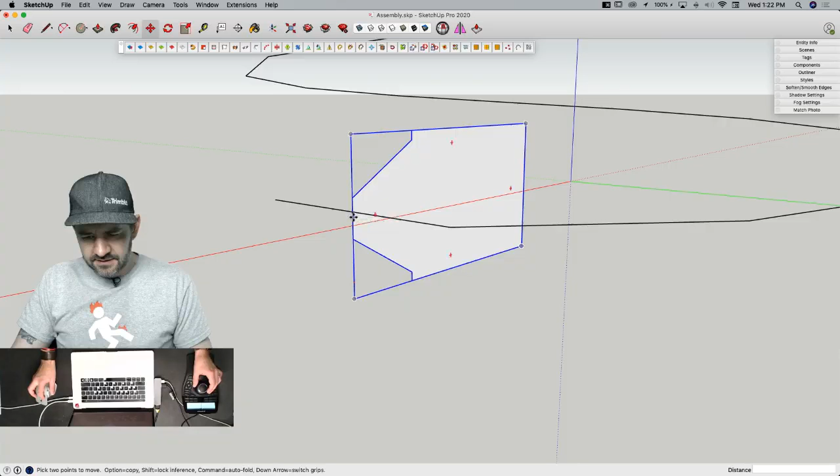I made my last piece of thread totally horizontal. This is on the green axis. My edge of my profile is on the red axis and it's vertical. So I'm gonna try this.

Let's try both. I'm going to start by grabbing all of this and say follow me with this shape. Still doesn't work, okay, so we've verified that's not an option. If I grab all of that and say upright extruder, what happens? It still only goes around there. I don't understand, that confuses me.

Because what should happen is if I just take this shape and say follow me, I start pulling it around here. You can see that the middle line is starting to slip as I get through here, and you can see how the back end is starting to tilt back. So that's the problem, is that it starts to spin around. I don't know why upright extruder is not okay with this.

I mean, I have a solution. I know that if I go in and tip everything the way I did, I can at least get it to kind of work.

You can also use this chance to try and learn how to use follow me and keep. Okay, I'll do it, because it sounds like you're making it up as you go anyway. Yeah, at this point we're off the track, so.

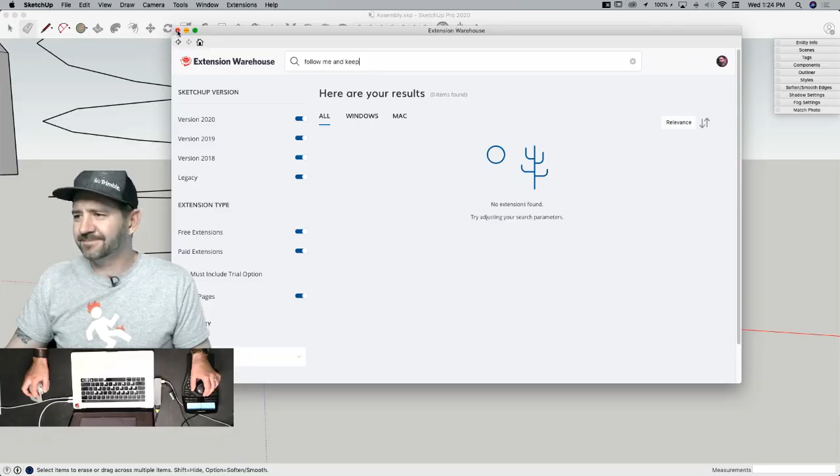That's on Sketchucation, isn't it? I guess so. All right, I'm just gonna... plugins.

So here's what I was doing before, and this was to get my spiral straight. I need, well, I guess I could just go like this. There we go, that line is perpendicular to this line, and now I can take this shape and rotate it on the red axis so that it lines up perpendicular. So now this start off shape is 100% perpendicular to the beginning line here.

And now I can just grab all of this and tell it to... oops, I closed it.

So Profile Builder, someone mentioned that one also as an option. Yeah, I have it, I have not actually run it. And I used Profile Builder back when it was the first version, and I know that's one I need to spend some time in before I start showing people again, because it is an awesome software that I am not in a spot to

do justice by just winging it. It'd be like trying to do a V-Ray video. Yeah, that's comparable. All right, so this is what happened.

I want to try to break this into small pieces that I can stack. The other thing I am trying to be conscious of as I do all of this is to make usable geometry. I want this to not be gargantuan. That's why I'm using such small pieces.

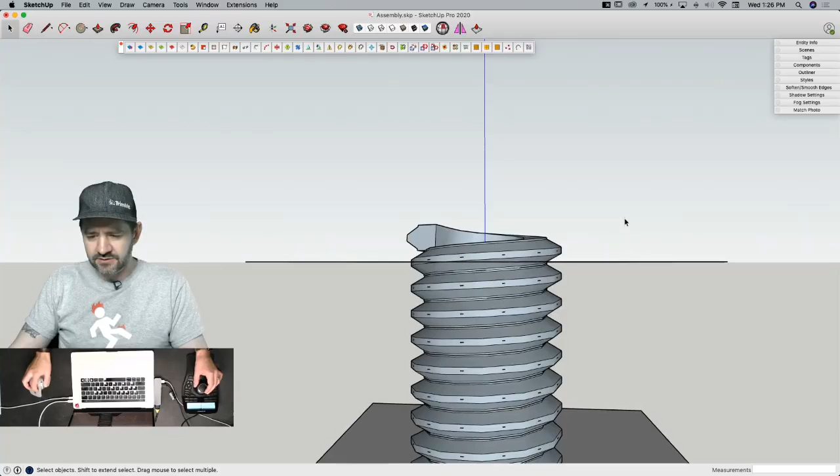All right, we'll take all of that. I'm going to take all that, intersect face with selection, that may take a second, it's got a lot of geometry. Nope, we're done. All right, and I'm going to come in here now and try to precisely lop off this bit. You know what's going to be fun?

I want to go spend time after this, grab those extensions you guys are talking about, and maybe recreate this exact geometry. Maybe not while everybody's standing and watching, but it would be interesting to find some different screw creation workflows and extensions and find the way to create the ultimate... you know what I mean? That'd be fun to do. Ultimate, I like that. Ultimate screw creation method.

All right, so there's my bottom cut off. I can actually get rid of all this because I'll make this a solid in just a second. By cutting it off at the edge, I don't have to go in and erase all that stuff on the inside because Solid Inspector will do that for me as long as I have it clean on the outside.

I'll do the same thing here, just get rid of all my extra geometry up top. Whoops, too much, there we go. And then these pieces popping up, and then just scrub around and get that circle gone. Oops, got an extra line there. Oops, got two extra lines. Nope, nope, that's not an extra line.

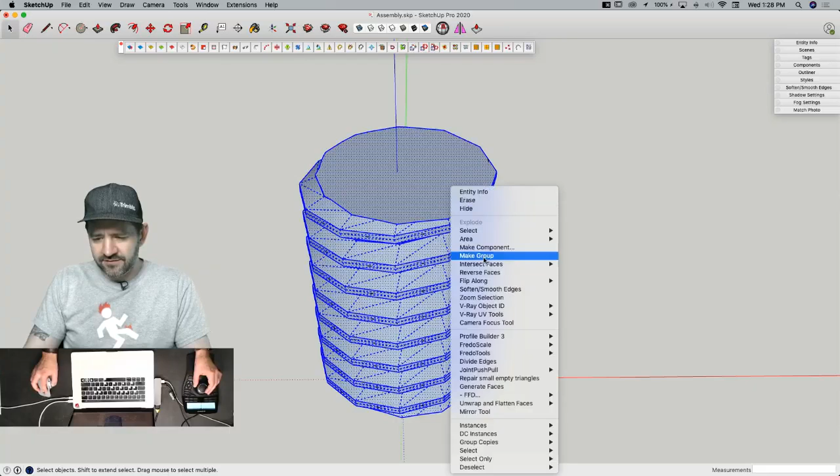All right, so if I take all of that, make it a group, I'm going to go ahead and run Solid Inspector, tell me there's a whole bunch of stuff on the inside. I was hoping it would offer to fix it for me. Maybe once I get this cleaned up, it'll do that.

Well, at least you're getting a chance to do some stitching. Hey, today's a good day, I guess.

Wait, what is this? What am I even looking at here? There we go. Okay, haha, there we go.

All right, so something's still connected. Oh crap! I know what this is. Yeah, this is kind of feeling like a bust right here. My internal geometry actually comes up and melds with my exterior geometry. They all touch, so this is not going to work. This is painful stuff right here. I just created a mess that I can't use.

All right, I'm gonna... What are you gonna do? The suspense is killing me. I don't know, I honestly don't know what I'm gonna do. That's no good. I'm gonna go to File and revert to my last save and see where that was. All right, we're back here.

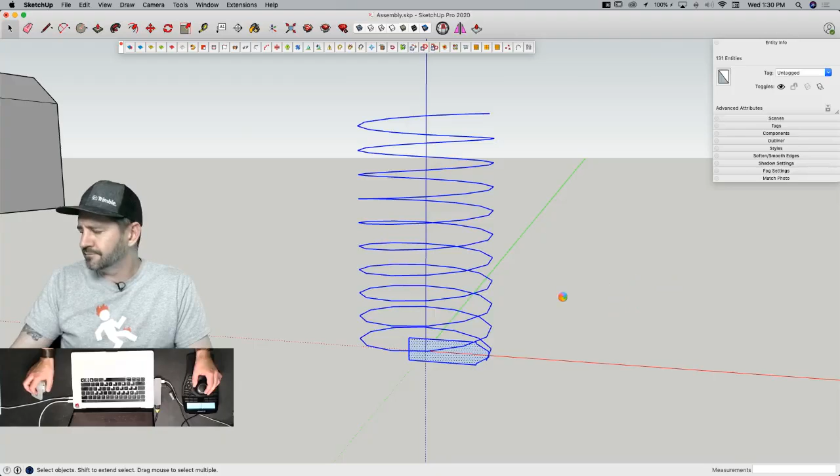Yeah, I'm missing some. I should point out, Dave actually told me exactly how to do this, and I ignored his sage wisdom. Or I thought I got enough from what he showed to do this, but apparently not so much.

Let me check something. So Dave posted in the forum thread a few steps, he said. Yeah, I think that's somewhere else. Ooh, forum thread. Yeah, boom. I'm not seeing it in this thread, unless he did it up higher. Let's see.

I don't see it either. Save me, Dave.

I know, this is not going the way I wanted it to go right here. All right, I thought I had it, man. Okay, here we go. Oh, there you go. He just posted it. Boom. All right.

So you just have this as a vertical piece. He forgot to hit send, that's why it wasn't there. That'll do it.

This is all coming off. So what am I missing? What am I not doing right here?

He's not. So he has this. He's not using any extensions. I don't even know if he's using Follow Me. He didn't say.

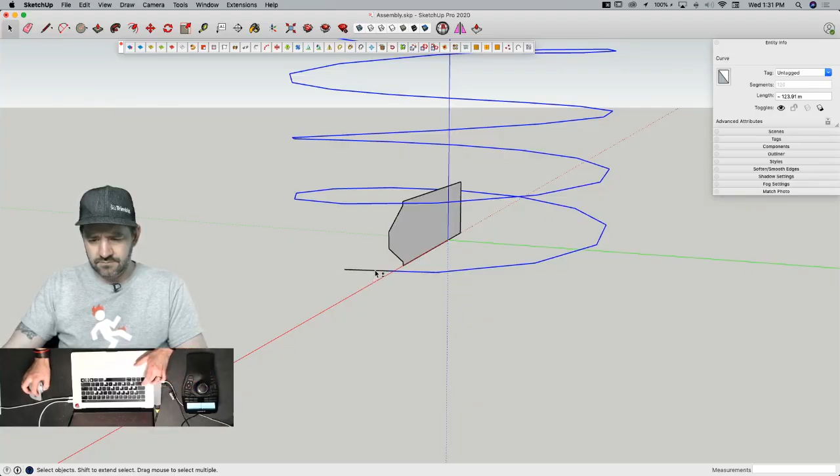Copy, rotate to the next vertex and move the copy up and stitch them together. Oh, come on, man. All you've got to do is do 1/4 of one thread, and then you can just— I know, you're right, that's not too bad.

So if I bring this to here, rotate this back to here. Oops. All right, fine, we'll do it this way.

I really want to do this without tools, so I guess this is my solution. And take this, make group. I'm going to rotate it from here to here.

And then I'm going to raise this up to the center point from here to here. And then I'm going to actually, right now, group these together.

See, this is where it would be sweet to have just some awesome extension loaded up that I could use. Or here's the other way to do it. Boom, done. I don't have that part though. I don't have the big reveal planned.

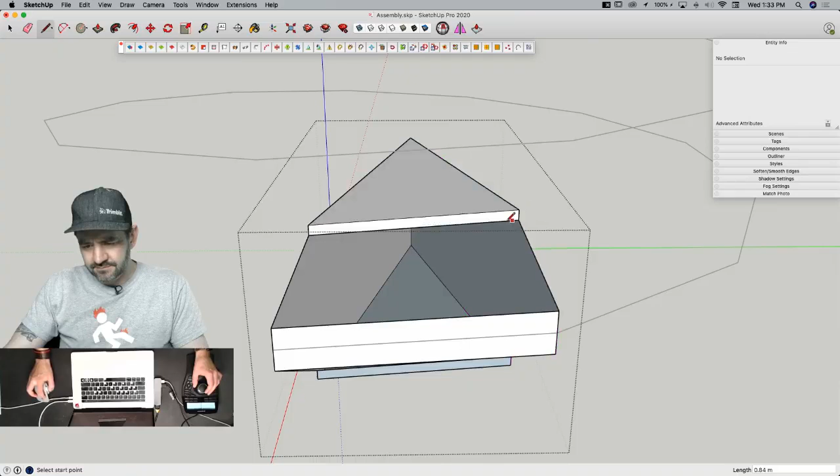And then I do have to triangulate this, but I can smooth it. Same thing here. Smooth it, and then orient faces.

Now I can take that piece, rotate from here to here, and scoot it up.

Okay, then take these two pieces, rotate from here to here, scoot it up. You know, each time I do this, I'm copying more pieces, so it's fewer spots to have to do. Rotate that from here to here, scoot it up.

And there is an extension, 1, 2, 3, 4, I only need 4. There's an extension called, what is it? Array? No, I can't remember what it's called. What's that?

So he updated with some more pictures, and most notably, he's deleting the interior stuff as he goes so that he doesn't have to do it with solid tools later. I was going to get one complete section like this and then explode that.

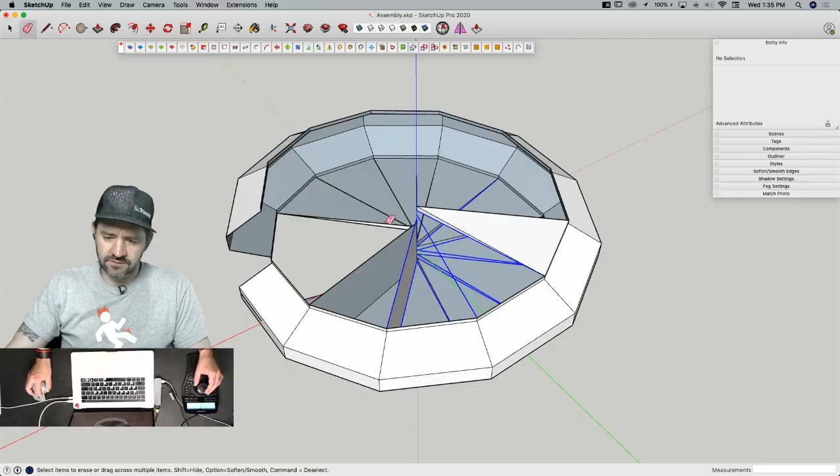All right, now I can come in here. Get rid of all this interior stuff. All right, there we go.

He said he still prefers the way that he did it in his video tutorial, and I'm unfamiliar with his video tutorial. He shared it with me, and apparently I didn't pay good enough attention.

All right, so I'm gonna just copy that up. 20. Oops. I shot that off into space somewhere. All right, try that again.

All right, once we got that. Wow, that was really something. I mean, it was a little tedious, but it definitely made a lot more sense doing it the by-hand method there.

Although you don't have any tools you can blame this way. All right, so I'm gonna take that for right now, and I'm just gonna soften it.

Dave said he'll put a link to the video once you tell him he can. Go for it, please Dave, teach the people. Because what just happened was not instruction.

There we go. Save it, save it. All right, so we got a screw.

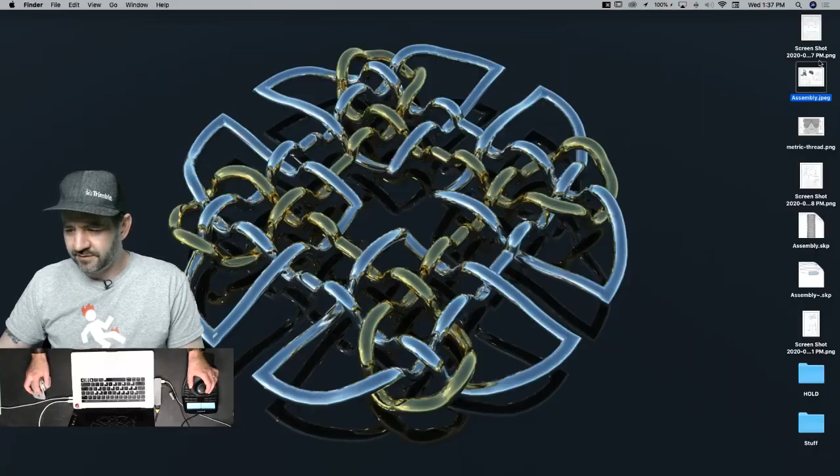Which is this piece right here. All right, let's get back in here. And styles, load that up.

I know, again pretty simple, but well, nothing should be assumed today, apparently. All right, so this is the wrong one. Nice, seems about right. Let's try that again.

Let's load the screw profile. They look pretty similar in the little screenshots. All right.

Okay, so this is what I have to actually, this is what I want to create. So I'm going to temporarily create a circle. I'll make a 12-sided circle just to make it the same. I'm going to make it 2, so it's a 4. I'm going to drag that up 25. So that's how long I got to make this.

So I'm going to grab all of this, and I'm just going to double it up. I'll grab all of it, grab it by a corner here, option copy. I'm not going to use all of it, so it won't actually stay double, but for right now I want to grab it and put it right like that. I'll re-soften that too, so those scars where it healed together go away. All right, looks good.

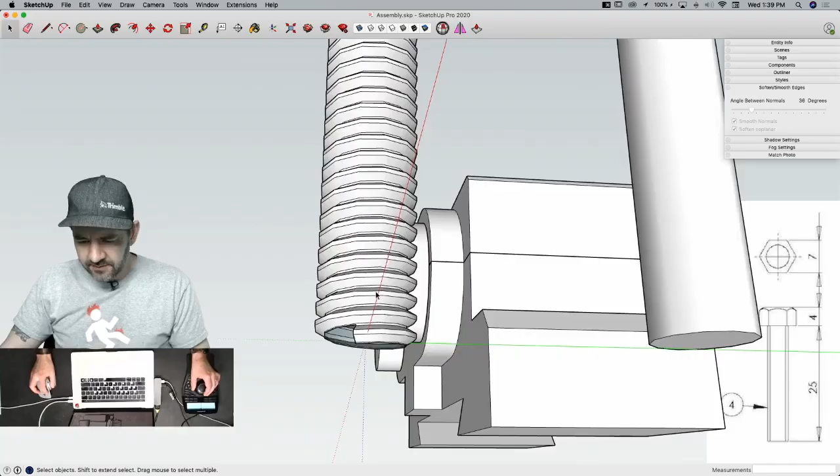And so what I want is this screw to be as long as this piece right here. So what I'm going to do is I'm going to grab it, and let's look at my hidden geometry. I'm going to grab this point right here and drop it vertically to the bottom of the screw. And then I'll draw a plane on the ground at that point. So that's where I got to cut this off at the bottom.

Then at the top, same thing. I will come, just draw a line across for reference, and draw a rectangle right there. That then is where I want to cut this for the top. And then I can just slap a screw head on top of there and it's done.

So what I'm going to do is I'm going to come in here, take this, all this geometry, and just say intersect face with model. And that's going to take all that geometry and just cut it any place it runs into anything else in the model. The only things in the model that actually cross that geometry are, of course, the 2 planes that I just created.

So unfortunately it is a lot of geometry. I actually could have made that done a little more precision, because I could have come in and grabbed just this section of lines and say intersect that instead. But you can see that worked.

All right, so now if I come here, we'll clean off that. And we could have done this with solid tools too, but this works just as well. And this goes away. And now I'm just going to delete this out.

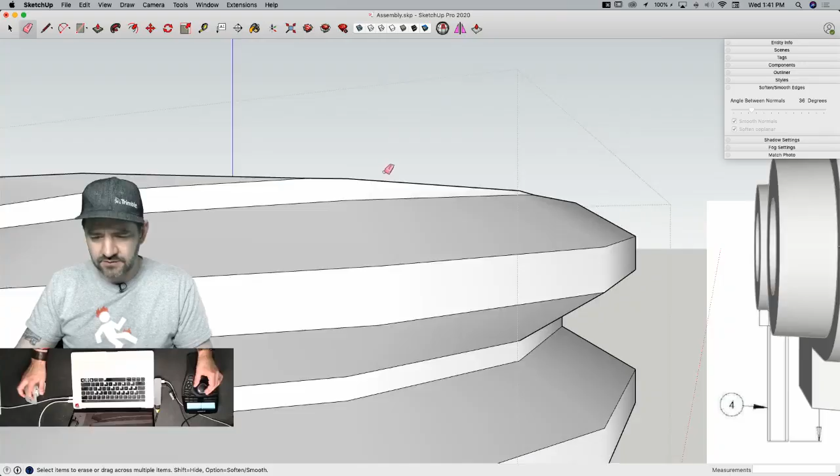Oops. If I come in here, all I have to do is draw a line across one side, and that should close. That tells me that I did it right when it closes like that. Same thing down here at the bottom. Go ahead and grab that like that. Delete. All right.

Okay, then come out here, get rid of this. There we go. And now the last piece is going to be the head.

So I'm going to draw the head separately, and we're going to, actually I'm not, I'm going to, because this is still in a group, I'm going to start by drawing a polygon, 6-sided, because it's a hex head. Go to, what I want to do is I want to actually find where the origin intersects this face.

What's going to be the easiest way to do that? Here's what I'm going to do. I'll just take this and take it from this face and shift it straight down to the origin.

Remember I was saying that when I'm working with circular things, I like to work off the origin to keep that middle point. This is especially important once I get my screw in here, because now my surface is nowhere near the middle of this surface, which isn't a circle now, because it's a circle with an angle cut of the ramp of the screw. This odd shape right here isn't actually centered here.

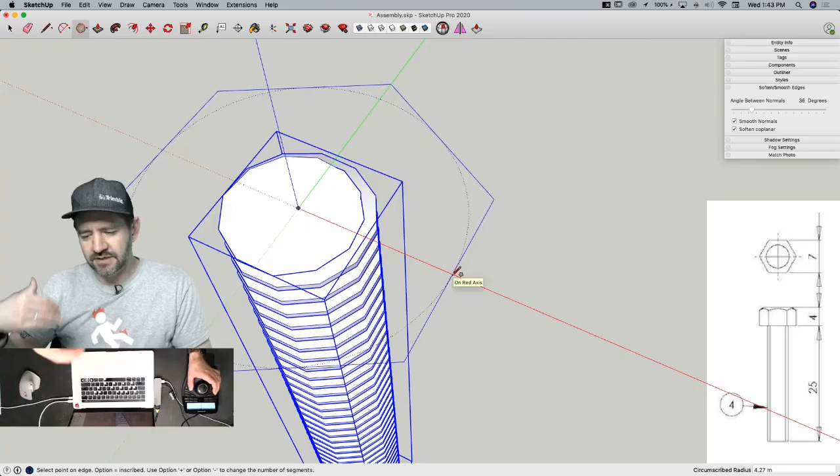The body of the screw still is, but this part isn't. So now I can come in here with my 6-sided polygon, start right here. My dimension here is 7 from face to face. But see how I'm pulling this out? It's by the corner. If I hit my modifier key, Option, or I believe Control on Windows, I can actually draw that with a dimension to the face rather than the corners. And that's just going to be 3.5.

All right, that then gets pulled up 4. All right, and that, we're not quite done yet, but make that into a group. I'm going to group these two together right now, and I'm going to move that vertically back up to the origin.

Check it against this was my measurement that I worked with. All right, that looks good. This looks tall, doesn't it? Kind of does, but it's going through both of the halves on that. And that is 7. All right.

One more fun thing. It looks taller because you don't have the little chamfer kind of bit around the top. Yeah, let's do that. Let's make that thing.

All right, so what we want to do is kind of knock this off. I've actually seen a couple different ways that people do this. You can use an extension like round corner or something like that to just get angle cuts around there, or use follow me or something like that. We're going to actually go in and take a spherical shape and use that as a cutter, which is a little different. So I need to figure out how big to make it.

I'm going to kind of do a little scaling as we go here. I'm going to go grab a new circle.

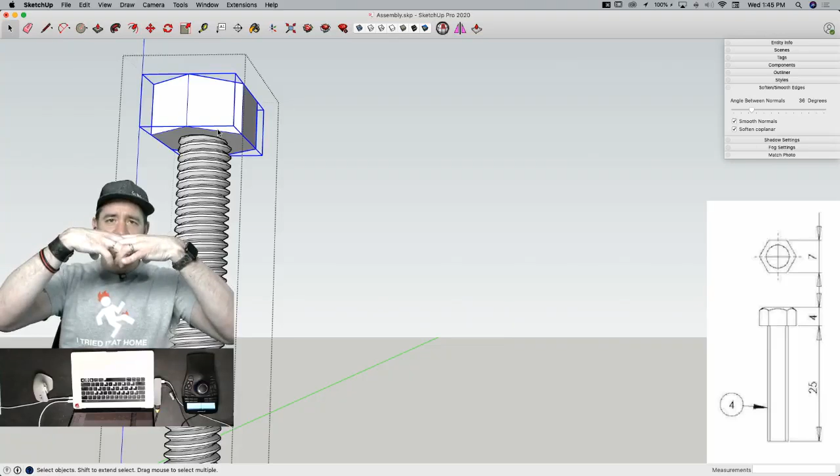But that's actually one of the things I'm doing intentionally right now. I kept this head separate right now because anytime we do Boolean operations, geometry intersecting with other geometry, all the selected geometry is checked. So if I say intersect this solid with this solid, it doesn't know that it only overlaps the solid at those places. It checks all the geometry of one solid against all the geometry of another solid. So what I end up with is if I have a lot of geometry, it goes slower than if I have less geometry. So in this case, I'm going to keep my head separate till after I get my little rounded corners off of there, and then I'll join that with the threads and we'll have the final screw, bolt, machine screw thing.

Yeah, all that. All right, so I'm going to go in with the circle. I'm going to go up to 24 sides. And I'm going to draw one circle this way. And then I'm going to draw another circle this way. And I'm going to draw them to the same point.

I'm going to go ahead and cut that circle in half. Get rid of that. Select these two halves. Oops, follow me with this half. That wasn't right. Actually, I need to do this. Select this half, follow me with this half. Also not right. Bat 1,000. All right, let's try that again.

You know, I did a video not that long ago that said you should be able to make a sphere in 6 seconds. Let's just do that. Let's grab this, follow me with this, and we have our sphere.

All right, now I'm going to select this, intersect face with context. That'll work. And now I can just get rid of this bottom half, because all I'm looking for is this dome right here. In fact, I don't even want that part, I just want this part.

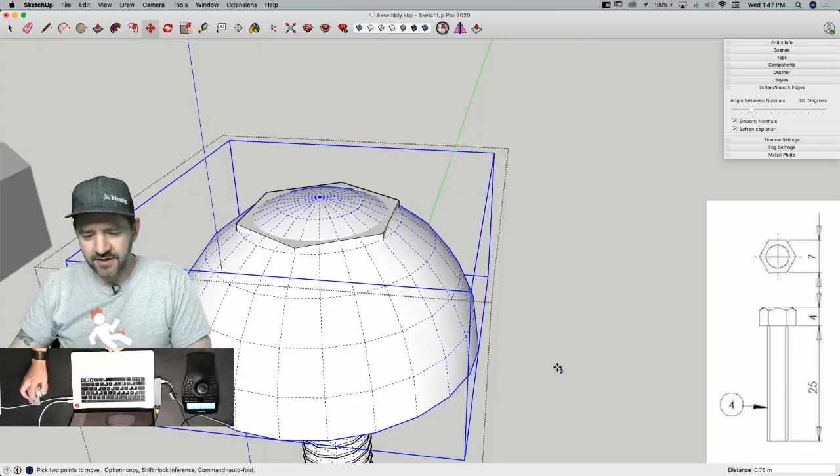Now, this is where I have to play with it a little bit. I don't have an exact measurement for the arc of this round or anything like that. As I start to slide this on the vertical axis, I'll see it pop up through the bottom, through the top. And then that's what's going to happen. It's going to cut off that much when I intersect it.

So I'm going to go ahead and do it. I'm going to explode my head and grab that head geometry and my arc, which I'll also explode. Then I'll just intersect faces with selection. With that, I can take this piece and get rid of it, and this piece, get rid of it.

Dave recommends using a cone instead of a sphere. Okay, that would work too.

I don't know, that's really going to look pretty cool. Let's see what our hidden geometry looks like. Yeah, that's comparable. I got a teeny bit of small geometry there, but a cone would work as well. So now I have this loose geometry and this solid component.

I'm going to go to this piece and explode it. When I explode it, it's going to join, but it will have left the face in between the two where they connect. So I'll poke my head inside the screw head, select just that center piece, delete it, and look down into the screw. Beauty. Let's check it—no errors.

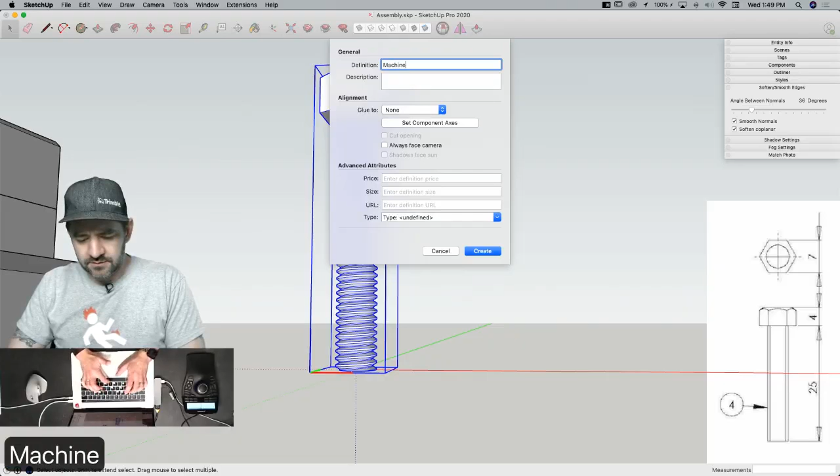All right, now this currently is a group. I'm going to make it a component. I'm going to call it our machine screw. I'll make it sound official and call it an M4.

Now, one of the things I did, and this was intentional, if I double click in here, we want to talk about where this is. When we go to place this, I'm going to use my guides because I'm kind of liking this guide thing. I'm going to put some guides in here for where this screw is supposed to drill in. I want to align the screw by the center point right here. So let me go create my guide layout or my screw layout real quick, and bring my other reference image up.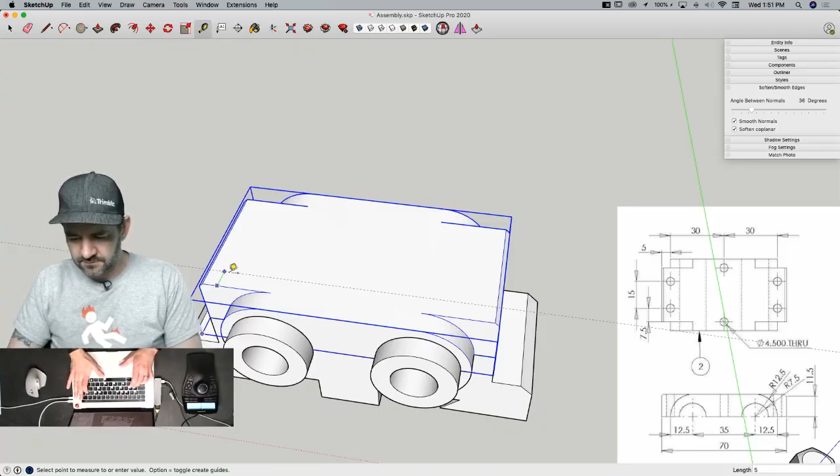All right, so I'm going to pull a couple of reference lines here. I can do this from outside. This is a group right now, but I can come in with my reference lines and pull it off of geometry—it's in a group, but I don't have to be in that group to do it. I'm going to come this way 7.5, which I just mistyped, 7.5. I'm going to come this way 7.5.

Now this is the tricksy bit. The dimension we have now to the center of these holes right here is 5 off the edge. But remember, we put a 1 meter cut on there. So I'm gonna have to pull from here—if I pull off of here, it's gonna be inside the geometry. See, guides pull along one plane. So I'm gonna have to pull off of here and go 4 instead to account for my 1 meter chamfer there.

All right, so with that we have the location of 4 screw holes. 2 more. This one is the intersection of this line right here. If you want to put a line on a line, you can—if you're good, you can wiggle it just a little bit and move it 0. I tend to pull it away like that and then drop it right back, and then it's centered. What I can do is grab an existing line, bring it over, and move to centered. So screw here, here, here, here, and here.

So talking about origins—oh, dang it, I forgot which one is supposed to use. Axes.

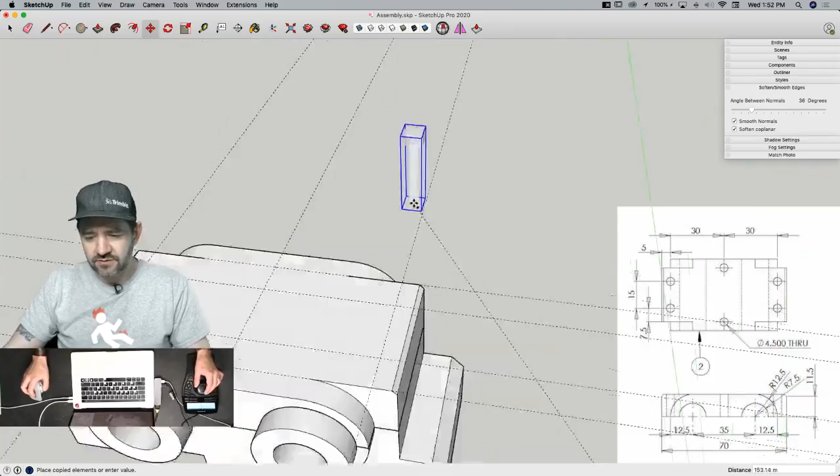Why not both? Axes, hatchet. I'm gonna grab it by this point right here with move, and then, oops, gotta select the right thing. And then I can use my modifier key option to bring it. As soon as, because I'm in version 20, it won't do this necessarily in previous versions. As soon as I rotate so that my cursor is behind geometry, my geometry will turn transparent, and then I can just go in here and drop it, boom, right there on that intersection.

That works really well if I'm pulling from the origin. But what happens if I don't? So if I come over here to my components browser, when did I save last? Too long.

Some days everything comes up roses. Some days, today, I don't know. Today is just not the day. Good times, good times. I blame Corona.

With Corona, all right, we still have our screw. All I got to do is get a couple of guidelines in here real quick. Man.

So, how's everybody?

And I believe this was 4. I did have a boss who reminded me when I failed and had to restart, work that second time through was always so much quicker.

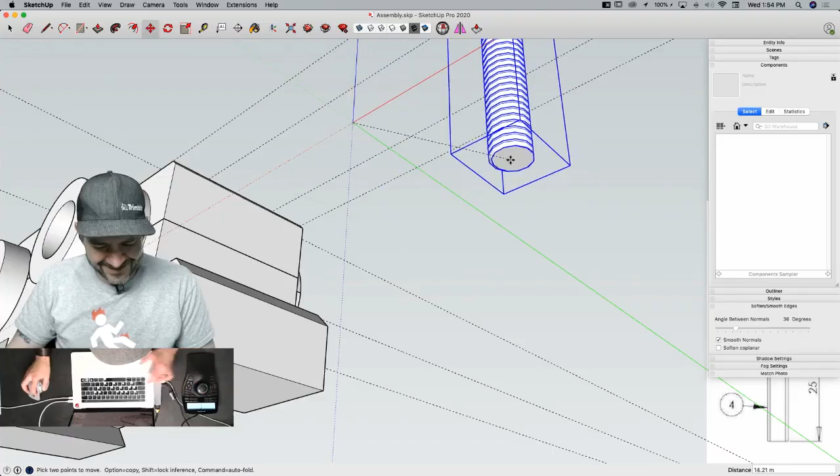That's right, all right, so we'll grab that again. Option, as I was saying, I'm gonna place it right here. Now, what we were talking about, this was our thing we were talking about, was if I go into the components browser and look at my in-model components, if I grab this machine screw right now and bring it in, look where I'm dragging it by.

I'm off here on the corner. So if I go like that, that doesn't help. And this is especially important because, like I said, if you look at the bottom of this, I don't have a nice round circle to pull a center from. So what I want to make sure I do is I get this component lined up with this point to place. So here's the thing that happens sometimes.

If I come in here, and just like I did before, I want to put that back in here. Uh-oh, I don't have a spot to snap to. So to transfer my origin from the outside in, actually, is there a way to, if I come in here and right click, can I say reset? Boom. Reset will place it back at the origin.

So if I exit now, nope, it's not gonna. So two-step process: right click on the origin, say reset, then grab your origin tool, click and trace the current origin. And now if I exit, it'll say, do you want to reset it? Yes, I do. Now if I grab that same piece, I'm grabbing it from the bottom, same spot. So I can grab it and I can place it right there.

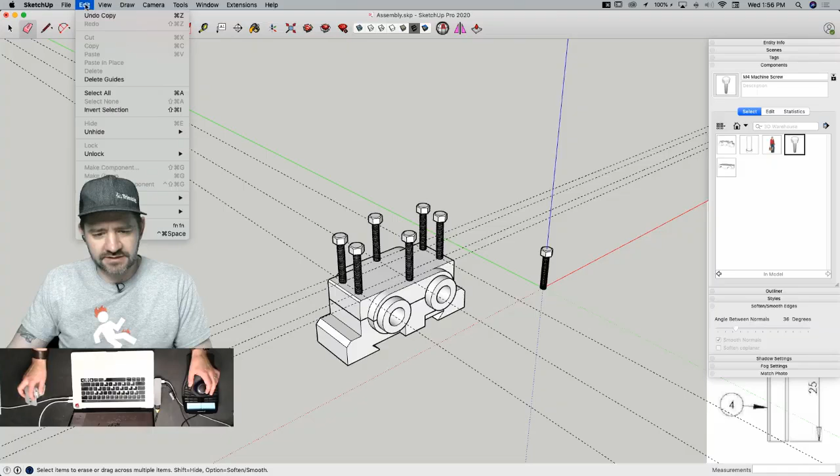I can get rid of my guidelines and say, turn my guides off, or I could actually, like I was saying before, I can come in here and say, delete guides. We're almost there. So each of these right now is a solid. What I'm going to do is I'm going to grab them all, and I'm going to drop them using the bottom of one of them vertically to the face of my part.

So if I look in X-ray, goodness, they're self-tapping, that went in so easy. I don't know why people complain about that. All right, so that's good.

But I got to cut that out of my other pieces. So what I'm going to do is open up my solid tools. Saved, I saved, you betcha.

And you guys saw I did some videos just recently on solid tools, and one of the things I showed was Eneroth solid tools. I'm actually going to use that. I'm going to go to tool palettes. I'm going to find, oh boy, it's really time to clean up. You can tell I've been doing more extension inspection videos.

All right, I'm going to, so Eneroth works a little bit different because with this, here, I'm going to do this in 2 steps actually. I'm going to hide these, whoops. Going to hide these pieces. So Eneroth actually does a better job of group selecting. So I think what I can do is just grab all of this. I think I can hit trim.

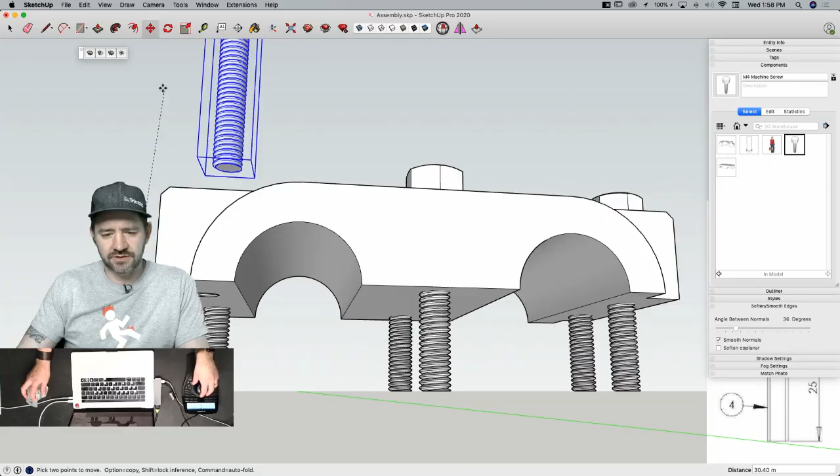So that gave me the perfect hole through there. So what I can do with Eneroth's tool is I can select my cutter, or my piece to be cut. Sorry, it's backwards. And I can say, cut this out. Take just a second or two.

Unfortunately, this is zero tolerance. There is no margin of error. I got it right, perfect, so I could actually just make holes slightly bigger than the threads and push those through on the top piece, and then they would tie into the bottom piece, but I didn't do that.

Wow, for some reason this intersection is taking a lot longer than the other. You can't hear it, but my fan just kicked on my computer. A lot of thinking going on. Hope you saved recently.

This falls right in line with the rest of this model, I think. This is about perfect.

We went from me spending a week - I'm not making excuses, I'm just looking at what's going on. I went from having the better part of a week to prep for one of these models once a week, to now I do one every other day. Sometimes it goes really, really well. I think we've had several streams that have gone just smashingly, wouldn't you say, Jody? Yeah, and then sometimes, with the exception of the Cobra, this is kind of the messiest that we've had.

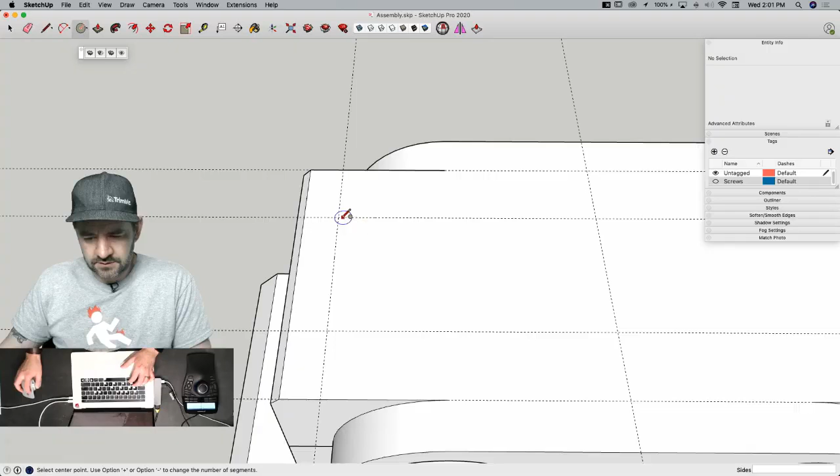I guess the radius would be 2.05. And I drew that out of context. Come in here. 2.05. And I'm just going to grab that circle. 4.5 is the spec. 4.5? All right, well then let's go, Mr. Richards. 2.25.

I'll grab that. Did you just do math in your head? Wow, it was an accident. I didn't mean to.

And we'll take that, option copy, right there. Andy wants you to go inside the component first. Okay. Are you already inside the component? We can. This one? This particular one?

Oh, yeah, he wanted you to cut in half. All right, well, I'll do this from here. I'll pull this down. I'll double click on this one. This is the gremlin's eye view, like for the gremlins that create stuff while we sleep.

That's right. And once you do that, boom. There. Oh, no, 2 more.

It just occurred to me that we could use SketchUp to model a refrigerator, close the door, and see how the light gets turned off and on. Wow, that's great thinking. I like that. Yeah, yeah. Next week.

All right, that's awesome. Now, let's go turn our screws back on. And I'm going to turn off this top piece and my 2 bushings. Put them on their own tag.

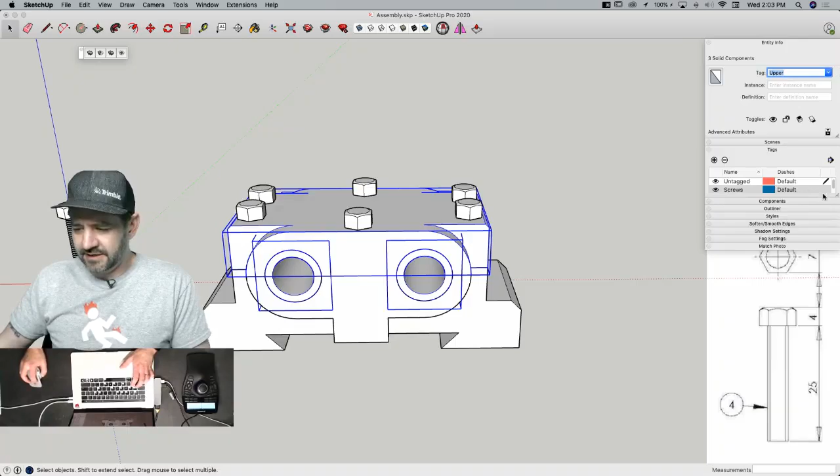All right, so this is where we want to actually pull screws from, or pull screw holes from. So I'm going to come in here and say, grab this piece and say trim this piece out of it.

All right, that took about 11 seconds that time. If I do that again, I'm sure it'll go faster because it knows how to do it. Save it first. I don't live like that. I'm on the edge. It's like I don't even know you.

Yeah, that would have probably been great. Sometimes you learn, sometimes this.

Well, no, I was interested about this process, because I was talking earlier about how, based on the amount of geometry, Boolean operations take longer. So the issue coming up right now is that after I cut that first one, this piece has so many more edges to check against. So every time I do this, I'm going to compound my Boolean selection.

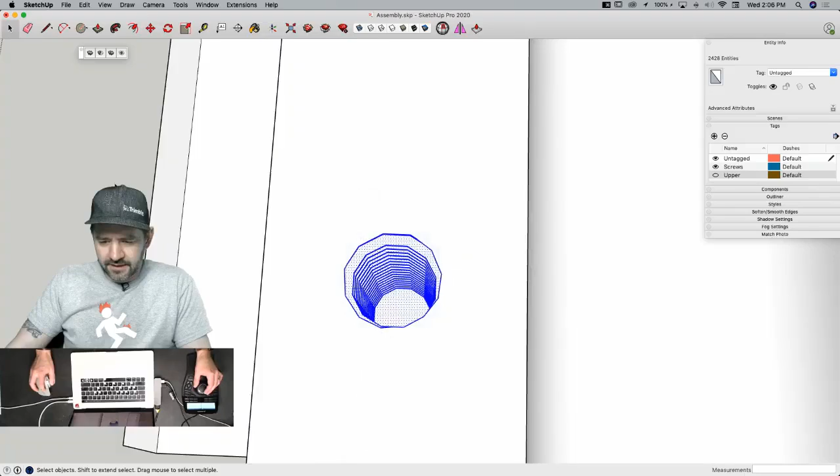And now with it selected, I'm going to turn my other geometry back on because I want to copy it from the same point. So I'm going to grab this point right here, Option. There's my screw hole. I'll copy it to right there, and copy that to right there, and copy that.

I was getting ready to ask Transom. Transom was asking if it would be a benefit to use proxy for bolts, but based on this workflow, that's not what you want to do, is it? Not if we're looking for a fully machinable thingy.

So now I'm going to turn my screws off. Oh baby, it all came together at the end. I love it when a plan comes together. Turn those on - ooh, look at those through holes. And then finally our screws.

Man, so I admit there was a struggle for a minute or two there, but we got it. Oh actually, well, MVP Dave Richards got it, really. Good thing he's here today.

Now, you could go back and sanity check - in your original file, it shows how deep the bottom hole is supposed to go. I think it said 15. 12.5. Yeah, so we didn't do that.

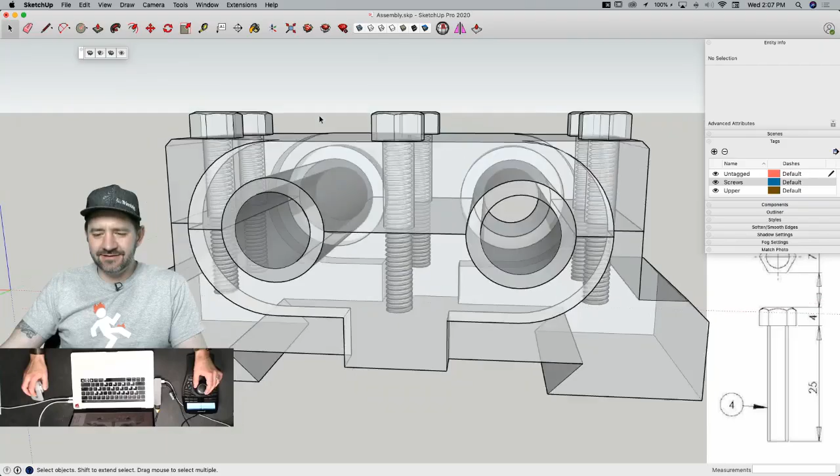I'm okay with that. What I could have done to fix that, which actually was easy enough to do - we'll just do it. No, it's 15, you're right. Yeah, I'm at 12.5.

That's just saying it's not - we don't have that. Oh correct, what you made is only 12.5. Yeah, putting the screws in here got it to 12.5.

So I'm going to undo all my screw holes. Dave points out that the screw holes go down deeper than the actual thread, which makes sense - you don't want it to bottom out.

So what I'm going to do is grab these - it's 12.5 now, so I have to go down 2.5 more. So I'm going to drop them 2.5, treating them all the same. I could do this with just one screw and it would work fine.

And now I'm going to select this and say trim out this one, only one. And then we're going to use the Jody method to copy that cutout geometry.

Or we should check it first, huh? Check it before you copy it a bunch of times - is that a saying? Measure twice, cut 3 times, 15. Get new line, start over. Yeah, that's not a saying I like.

I'll grab all of that, and then I will copy it from here to here.

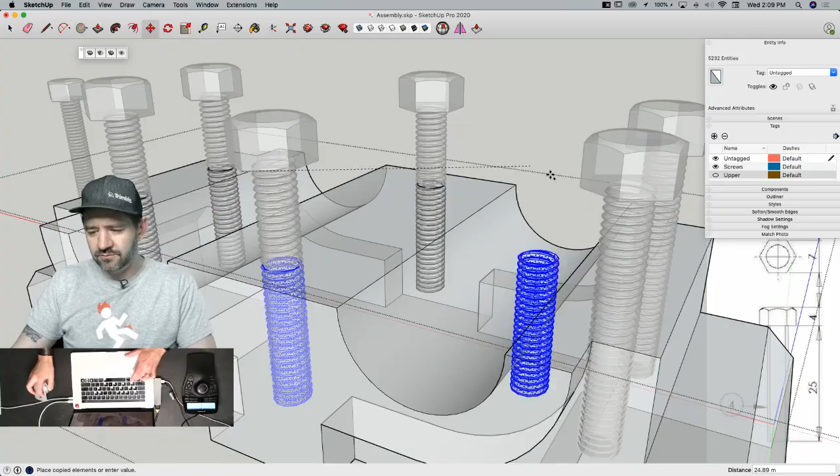Oh, I'm having 3D mouse problems, issues. If you just did them along one side, then you could use your rotate 180 degrees method. I could, but because these are aligned, they would be a half rotation off, which in the real world wouldn't matter so much, but in my 3D model that would mean a lack of precision.

All right, so then I grab my screws and scoot them back up 2.5. There we go. So now my screw holes go 2.5 past the bottom of my screws, and turn my upper assembly on, and we are golden-ish, goldish. Stay gold, Pony Boy.

That looks pretty legit. Now you need to go and apply the appropriate color so that it's a nice steel gray look. A nice ugly blue.

That's so funny, that people see colors like that. I totally just see gray, and I wouldn't call that blue at all. I had someone call my Jeep blue, and I was confused. I'm not saying you're wrong, just your eyeballs are different than my eyeballs. That's true, I have my own.

Yeah, it's a blue-gray color. Here, you know what we can actually do, because we have the technology, is we can actually do this. I could say let's go grab that color. Ooh, maybe we should go with the lighter color.

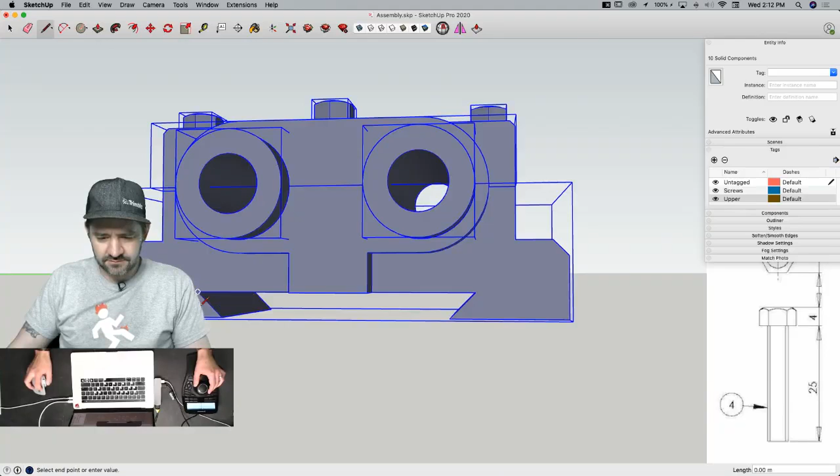Oh, I'm going to have to change my precision. That's less than a meter. What do you want from me? All right, let's go to millimeters. All right, let's go here. 5 millimeters, boom, we're back to scale. Boom, all right, I'll take that.

So since you did the little hack to get the thread to go down an extra 5 units, did it script your threads in the top half? No, because the top half is just through holes.

Oh, okay, and that's what Transom suggested. Actually, Transom said now that he knows how to do this, he's going to—I think he said he was making a hand plane. So I think we have to have proof on his part. We need to see the SketchUp model on the forum. Yeah, otherwise Jody will call you out on lying. Yeah, I'm making a list right now—I'm not checking it twice yet. You're no Santa, all right.

Whew, that wasn't too bad. I was a little stumbling with the screw. I thought that was going to be a little easier than...

Do check out Dave Richards' video—he put it up on the forum. He did offer it to me. I honestly only had a couple minutes, so I kind of scrubbed through, and apparently I missed some important stuff. But it was a very good, very comprehensive video on creating screw threads, and it was awesome. He did a great job.

And keep an eye out for Transom's file up there also. So if you don't see a hand plane from Transom in the next week, start the harassment. It's cool, he said he'll do it. So all right, we've got commitment on his side. It's official, whatever it is.

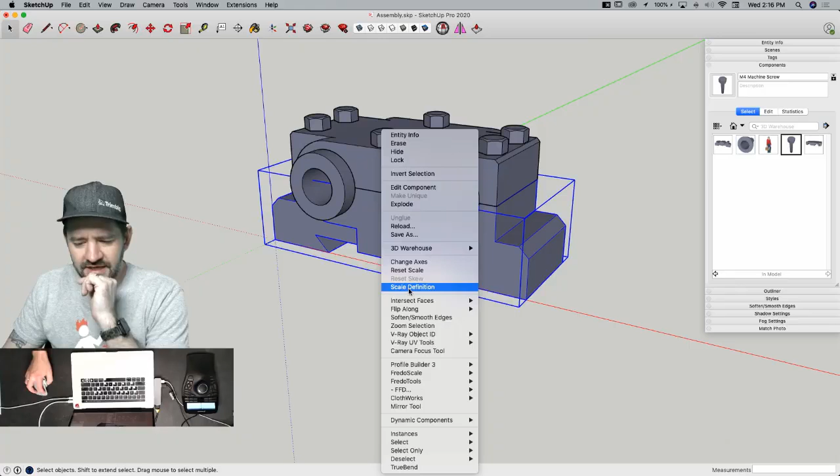So once I get to this point, I'm trying to think what the easiest way to do this is. If I just come in here—there it is—I can click Scale Definition. So I just have to do that once to each component, I think.

All right, now I should be able to bring this in. There we go. Yeah, that's one of those things you'll see on warehouse files where you bring something in and it'll be the right size, and then if you look at your component list, you find out it's teeny tiny or huge because people do what I just did and don't scale the definitions too.

Thank you. Good catch. Thank you, Dave, a lot today. Yeah, so I think that wraps that up.

We're going to be back here modeling again on Friday. We're going to do an elaborate structural architectural column, I think is the proper full name of the thing. But basically some fancy looking old school Greek or Roman column, I don't know, I'll have to do a little study between now and then, but we're going to do something with some scroll work and different pieces up at the top of a column. It'll be fun, a lot of good geometry creation.

My plan is to use some native tools, but we'll probably get into some things like maybe Fredo Scale or Curviloft, maybe a little subdivision. I don't know, we'll see where it goes. I'm not sure exactly how much detail we want to get into this column or how long it'll take, but it'll be a fun thing to do, some cool geometry modeling and classic architecture.